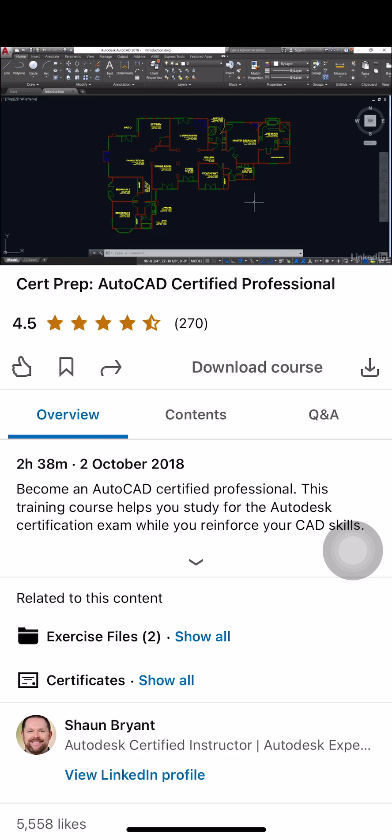You really should have taken the AutoCAD 2018 Essentials course on the website first before doing this course. It's sort of a prerequisite, really. The idea being is we're then going to review all of the aspects of AutoCAD that you need to obviously prepare for your certification examination.

So that's really what you should know. The other thing you should know is that we are using AutoCAD 2018 for the videos in this particular preparation course. Now, don't worry about the exercise files. They will be saved back to a previous version, the 2013 DWG format, to make sure older versions of AutoCAD can read the files.

But what you should know is your AutoCAD Essentials, which you've done by doing the AutoCAD Essentials course. And also you should have been using AutoCAD live in a work environment, a business environment, so that you know how to drive AutoCAD effectively in your workplace. That way you've got the live AutoCAD expertise and you've also got the academic AutoCAD expertise from the videos you've been using to learn from on the website.

As we work through the videos in this course, I'll prompt you to use specific exercise files. Those exercise files are in the usual AutoCAD DWG file format. So if you look at the drawing on the screen in front of you right now, you can see that it's called introduction.dwg. You can go to the website, download that as an exercise file, and use it to follow along with this particular video if you wish.

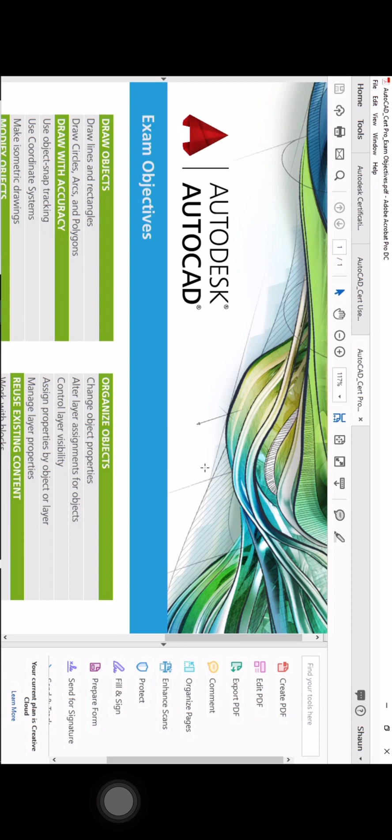We're starting a new chapter now in our AutoCAD Certified Professional Preparation course, and we're going to have a look at drawing objects, how we draw objects in AutoCAD. So I've got a new drawing available for you called Lines and Rectangles.dwg, and the name kind of gives it away. We're going to look at drawing lines and rectangles in a blank AutoCAD drawing that you can see on the screen.

When you download lines and rectangles.dwg from the website as an exercise file, you can see it's an empty drawing. The model space is empty right now. The only thing I will ask of you is make sure that you go to the Home tab on the ribbon, go to the Layers panel, click on the drop down, and just make sure you're using the Object layer as your current drafting layer.

So we're going to have a look now at drawing lines and rectangles. We're going to go to the Home tab on the ribbon, go to the Draw panel here, and click on the Line command there. Now you'll notice I use the ribbon a lot, I don't tend to use keyboard input. If you're using keyboard input, that's absolutely fine, but it's entirely up to you which user interface you use to draw in AutoCAD. So it's prompting me now to specify the first point of my line.

That's nice and easy. I'm going to type in 0, 0. The coordinates pop up on the dynamic input there, and I'm going to press enter. Now it may look like it's off the bottom of the screen - it is, so hold down the wheel on the mouse, move the mouse upwards, and just pan upwards a little, and you'll see that you can see where that line now starts.

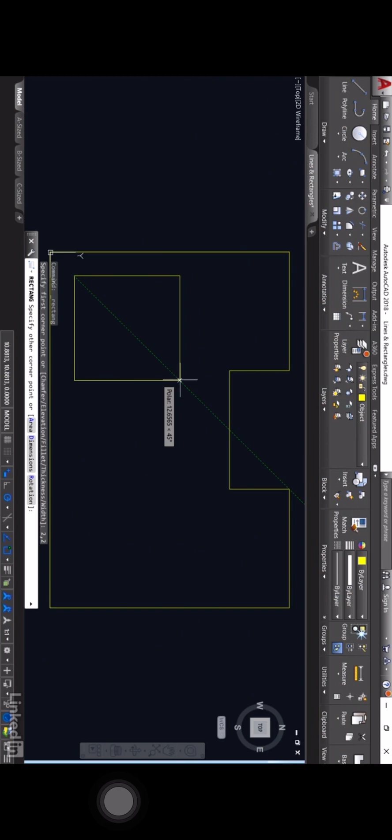As I drag upwards to the right, you can see I can size that rectangle in a freehand fashion. Now I'm not going to do that - I'm going to specify the size of my rectangle. I can do this in two different ways: I can use a relative coordinate, or I can specify the dimensions as you can see on the command line. To specify a relative coordinate, I need the @ symbol, normally Shift and 2 on your keyboard - it depends on American or English keyboard, but look for that @ symbol, the one you use for email addresses. So if I put an @ in there, it appears in the dynamic input, and now I'm going to specify the size of my rectangle.

What you've got to specify is the X direction followed by the Y direction. So in my X direction, I want it to go 6.5. I then press the comma key because it's a coordinate. And in the Y direction, I want it to go up by 11.5. So basically I'm going from that first point of the rectangle, the lower left corner, along 6.5 units along the X-axis to the right, because it's a positive value, and then up the Y-axis 11.5 units, again because it's positive. When I press enter now, there's my rectangle nicely placed like so. That's one way of placing a rectangle.

Let's go back now to the rectangle command. I could go up to the draw panel and click on the flyout to get rectangle, but I've just drawn a rectangle, so I can press enter or spacebar to repeat the rectangle command - you can see it on the command line. So I need to specify another corner point - this time it's going to be 18,4. There's the coordinates, enter to confirm, and it appears over here on the right hand side.

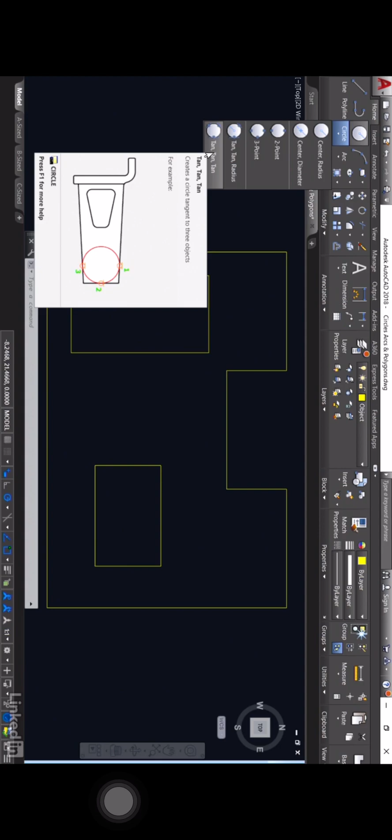I'm going to use tan, tan, tan, which creates a circle tangential to 3 objects, as the tooltip shows. So I click on tan, tan, tan. The good thing is that when it comes to object snaps, AutoCAD now knows only to find tangents. So I hover here, and it gives me a deferred tangent. I click on that line, hover over this line, click on that line, hover over this line, click on that line - 3 tangents - so it now knows where to place that particular circle.

Now let's look at a slightly different method of drawing a circle. I'll go back to the draw panel, click the flyout again, and this time use tan, tan, radius. I click on it, come into the drawing area, and again it knows to look for tangents. I select this line for a tangent, click, this line for a tangent, click. It then asks for the radius of the circle. I'll go for a radius of 2, giving a diameter of 4. I type in 2, press enter to confirm, and there's my circle of radius 2, tangential to those 2 lines I selected.

Now, it's all well and good having objects to provide tangents to create circles, but what happens if I need to physically place a circle in space using a coordinate? I'll go back to the circle command, click the flyout, and create a circle of diameter 5 at a known coordinate.

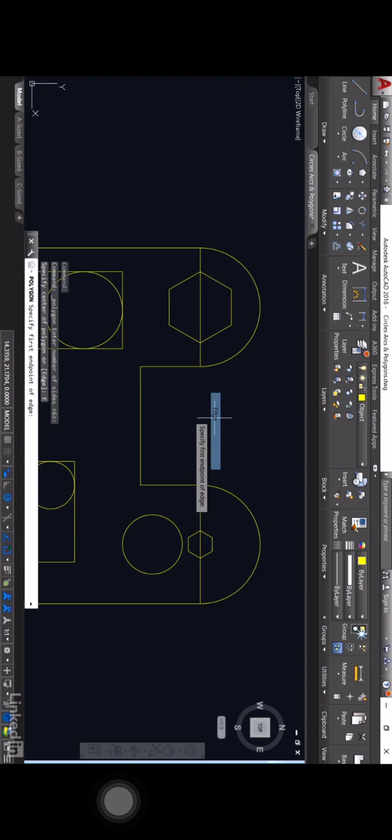So what I'm going to do now is use this edge here, this polygon I've just created. I'll go back to the polygon command, stick with 6 sides, and press enter. Now I'll right click and select edge, and using my object snaps, go from that endpoint to that endpoint to form the edge of the 6-sided polygon. And there again is a hexagon all drawn up neat and tidy using the polygon command.

Now I've used some very simple examples here to show you how to draw circles, arcs and polygons in preparation for your AutoCAD Certified Professional exam.

We're starting a new chapter now in our AutoCAD Certified Professional Preparation course. We're going to have a look at how we draw with accuracy in AutoCAD. Now, I cannot stress enough that the examples I'm giving you are quite simply that - examples. They will not replicate what you will get in your Certified Professional examination. So what I'm giving you here is the ability to review, revise and prepare. It will not guarantee you a pass in your exam.

So for this particular chapter, we're looking at drawing with accuracy, and I've got a new drawing for you. You can see the name at the top of the screen: it's called Draw with Accuracy_tracking.dwg. So you can guess by the name of the file that it's going to be tracking that we're going to look at, the object snap tracking.

So what we've got is a side view and an end view of a small block component with a little cutout and a hole in it. What we're going to do is generate a plan view to the top left above that side view, and we're going to use object snap tracking to do that. The lovely thing about object snap tracking is it allows you to take up to 7 points concurrently and track them without having to draw construction lines. It's very quick and easy to do.

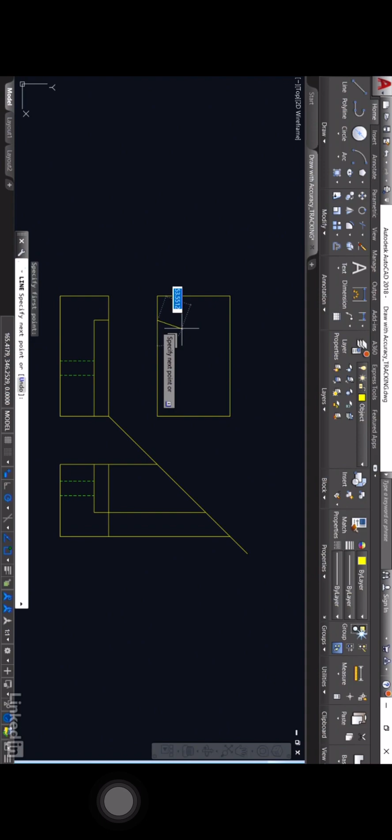Now I've got the cutout line here coming off of the 45-degree line, so I hover there, and as I come across you'll see that I get a snap point again. So I click there, and all I've got to do now is take that across to there, get the intersection, click there, enter to finish. There's my cutout in plan.

Now you'll also notice I've got some dashed lines here - these indicate a hole through my shape. So what I can do now is project those lines up again. Now what I would do here, if I was drawing hidden detail, I would perhaps use the hidden layer, but I don't need to because this is in plan, so basically this hole will now be visible.

So what I do now is go up to the line command again, and I project these lines up onto my 45-degree line. So there's one line there, spacebar or enter to repeat the line command, and there's one line there as well, and then obviously enter to finish.

Now the benefit I've got here is I can actually draw a circle if I want to - I can use a 2-point circle for this. So if I go up to the circle command and want a 2-point circle, as in each end of a diameter, click there. Now this is where you've got to think a little bit about your object snap tracking - specify first end point of circle's diameter, so I need a corresponding end. Now a circle is the same all the way around, so I can figure this out as I go.

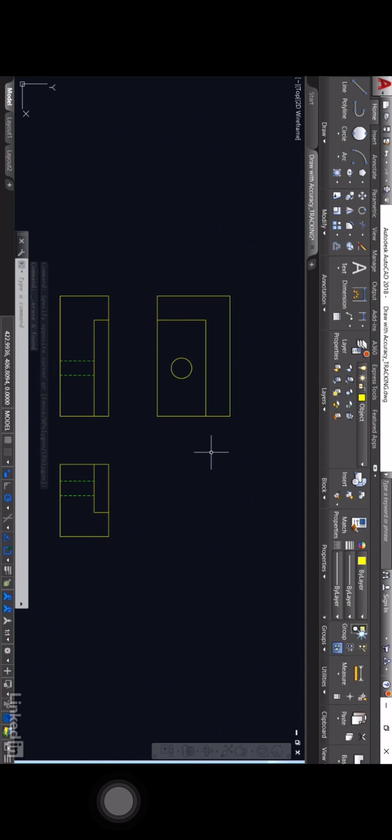Now, all of the lines that I used that are sacrificial, I can get rid of. So I'll do a little crossing selection there, just delete those, and I've now got my plan view exactly in place, purely using object snap tracking.

What we're going to look at now is the ability to draw with accuracy using our coordinates in AutoCAD. Again, we're in the Model tab. I've got a new drawing for you called Draw with Accuracy - coordinates.dwg.

You can download that from the exercise files on the website and use it to follow along with the video. We're going to use the layer called Lines on the drop down on the Layers panel. Make sure you're using the Lines layer.

We're going to draw some lines using coordinates only. We're going to draw a square with 4 lines using coordinates to do it. I'm going to go to the line command on the draw panel on the home tab on the ribbon, click on the line command and come into the drawing area. The first point of our line is 0, 0, enter.

You'll see that it goes almost towards the bottom of the screen. Just pan upwards a little bit, holding down the wheel on the mouse and moving the mouse. Now we're going to type coordinates for each corner of the square. The square is going to be 400 units by 400 units, so I want to go vertically upwards. In this case, I'm going to type 0, 400 - so 0 along the x-axis, but 400 up in the y-axis.

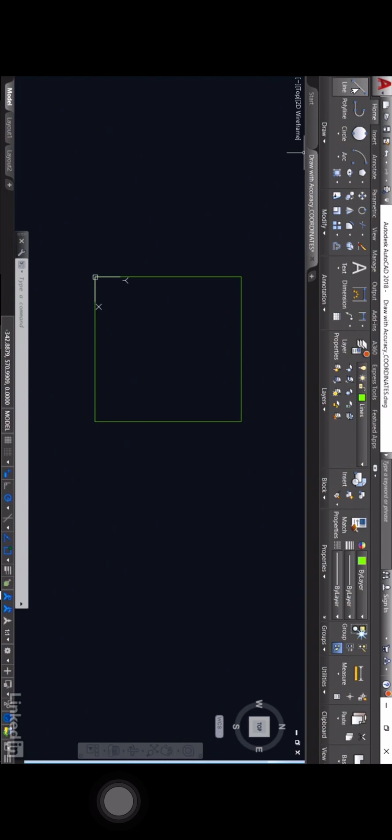I'm going to go to the line command again on the draw panel. I'm going to hover on that midpoint snap there. As I come down, that gives me the exact center point of the square, and I click. This time I want my line to go off this way at 45 degrees. If I want to do that, I've got to move along the x-axis and up the y-axis.

So that means I've got to specify a distance, and I'm going to type @ again because I want it to be relative. I need the @ symbol, then go 400, 400 - so 400 along the x-axis, 400 up the y-axis, enter. If I roll back a bit and zoom out, you can see there's my line.

Now what I'm going to do is come vertically down, and I can utilize my tracking - hover over that end, click there, and enter to finish. As you can see, very quick and easy to work with your coordinates to draw lines at angles and draw straight lines. Now if I want to draw a line at an angle, I can do it a slightly different way - I might have a distance and an angle that I need to follow.

So I'll do a line command now. I'll use this endpoint snap here, click like so. And as I come out and up, you can see that my polar tracking will allow me to work at 45 degrees if I want to. I'm not going to. You can see the distance there as I go along that polar tracking is 298.3398. Let's say 300. So again, I use the relative at symbol, and I want it 300 long. But if I do a less than on the keyboard rather than a comma, which I've just done, can you see the comma automatically takes you to coordinate readout?

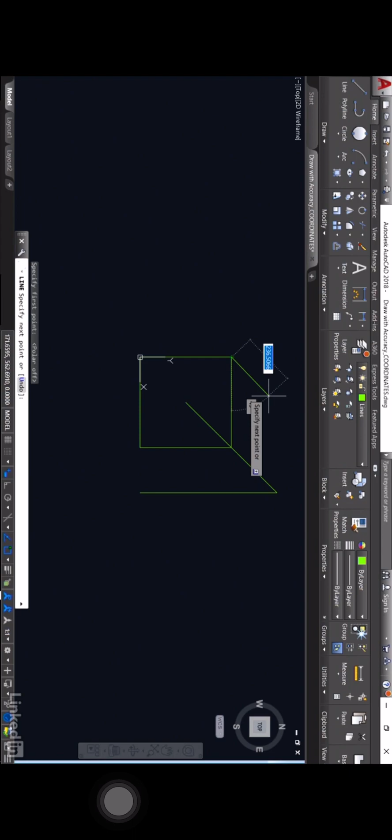How do I get an angle readout on there? Well, let's just hit escape. Let's not use coordinates this time. Let's do that again. So we go to the line command, and this time I'm going to switch off my polar tracking so I know I've got no green dash lines to confuse me. I snap to the endpoint and come out. Now, obviously, the dynamic input is still giving me that angle, but I can't get exactly 45 degrees because the polar tracking is off. So we're going to do that 300 distance again. At symbol first, 300 long, and then shift and comma, and it gives me an angle. How lovely is that? So I can do a distance and an angle, 45 degrees there, enter to finish, and there's my line, enter to close the line command.

So you can see that I can use angles and relative as well. And the other one I could use, if I want absolute coordinates, is the hashtag. Now the hashtag I can use anytime I want, and you'll find that again on your keyboard, depending on whether you've got an English or an American style keyboard. Hashtag is useful, and if you're using a UK keyboard, you'll find that the pound symbol will actually give you a hash key unless you've got a 102 keyboard layout. But if you put a hashtag instead of an at symbol, it's absolute coordinates and they are relative to 0,0 in your coordinate system.

We're staying in our Draw with Accuracy chapter, but we've got a new drawing for you. It's called Draw with Accuracy isometric, and you can download it from the website and use it as the exercise file for this video. Now, as the name states, we're looking at isometric and the ISO draft functionality of AutoCAD, where you can create isometric drawings that give a representation of a 3D object, even though they are a 2D drawing. And you can specify where your ISO plane is, whether it's to the side, looking from the top, and so on.

How do we do that? Well, it's in your status bar settings, but before we do that, just make sure in your layers panel you're set to the object layer, as you can see at the top of the screen. Just use the layer drop down to make sure you're using the layer object, like so. Now, in order to draw in this ISO draft setting, it needs to be switched on. It's down here on the status bar, this funny little line crossover thing. If I click there, that switches it on and it goes red and green. Can you see my crosshair changes? And what it's doing now is telling me I'm in this isometric drafting setting.

And what I can do is click on the arrow here, and I can set my isoplane to the left, to the top, or to the right. So if I set it to the top, like so, and come into the drawing area, I can specify the top of my isometric view. Now this is really nice. I really like this because it allows me to draw quickly and accurately with the right angles, the 30 and 60 degrees that I need to draw in an isometric fashion.

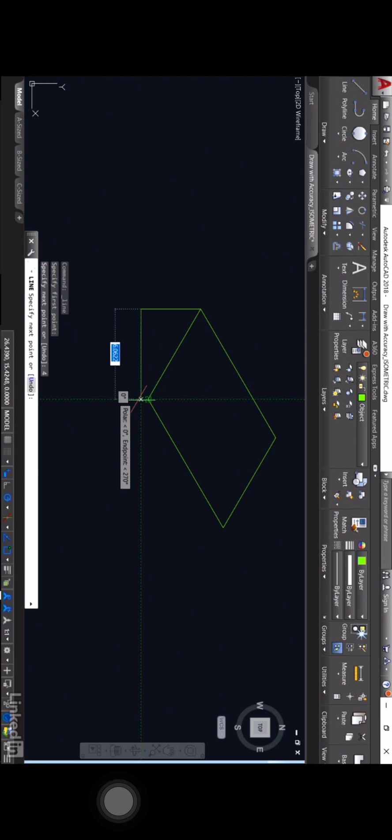I can hover there and come vertically down, using object snap tracking. As I come up this way I've got the angle again, so I hover there, come down this way, and it all snaps neatly at angles so I can draw my isometric view. I snap to the endpoint there, press enter to finish, draw one more little vertical line from endpoint to endpoint, enter to finish, and there's my isometric view.

With that ISO drafting and the ISO planes, it's very quick and easy to create a nice little isometric view in 2D that represents a 3D object.

We're starting another chapter now in the AutoCAD Certified Professional Preparation course. We're going to have a look now at how we modify objects in AutoCAD.

So we've got a drawing now called modifyingobjects.dwg - you can see it at the top of the screen. You can download that from the website and use it as the exercise file for this whole chapter. We're going to start in the first video and work our way through the chapter, saving step by step as you go from video to video, because all of these are different modifying tools we're going to use in AutoCAD. Ideally we're just going to use the same drawing, saving after each video - it's a little easier than using a separate drawing each time as we work through the chapter.

The first thing we're going to look at when we modify objects in AutoCAD is move and copy. Now, there are normally 3 ways to get a command to kick in AutoCAD: you can use the keyboard, the ribbon at the top of the screen, or the shortcut menu in some cases.

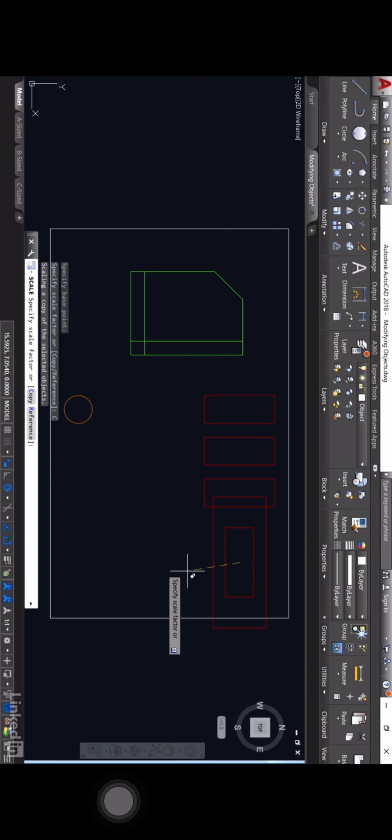Now you'll notice down on the command line there, can you see copy and reference? So if I right click and select copy, it'll leave a copy behind. And if I specify a scale factor now of 1.5 again and press enter, it leaves the original behind. So remember, you can copy, but it won't copy by default.

So that's your rotate and scale when you're modifying objects in AutoCAD.

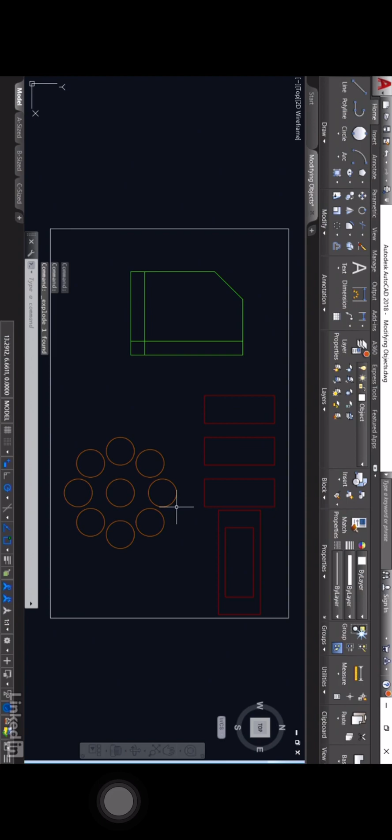So I can remove the ones I don't need. I might not want that one, nor that one. So I just delete those, hitting the delete key, and I've got a slightly different looking arrangement of my circles.

So that's how you use the array command in AutoCAD, and I've shown you some of the simple tools there in how you array and place array objects in a drawing. Now, obviously, as I've stressed previously, these particular exercises allow you to revise, review, and prepare for your examination. I'm not saying that's the sort of question or case study you might get in your exam.

We're staying in our modifying objects.dwg file, and what we're going to look at when we modify AutoCAD drawings this time is trim and extend. You'll find them on the Modify panel on the Home tab on the ribbon.

We're going to look at trimming first, and we're going to trim some of these green lines here on the left of the drawing. So I go up to the Modify panel, click on the flyout here and select Trim first, and I'm going to select my cutting edges. My cutting edges are going to be this line here and this line here, and Enter to confirm that.

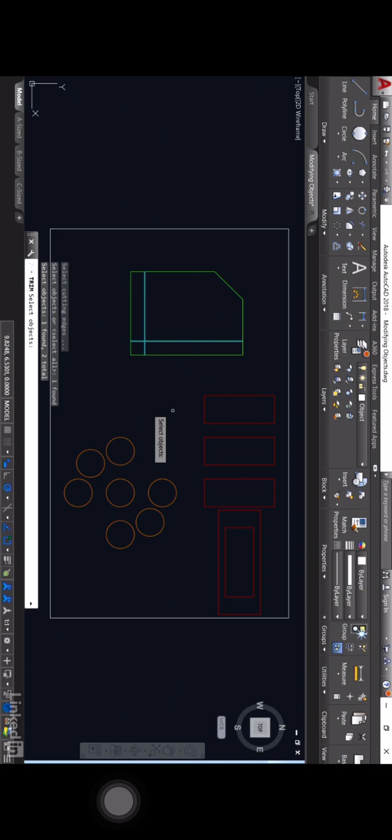I then get the prompt, Select Object to Trim or Shift Select to Extend. So when I'm trimming, I can hold down Shift and extend. When I'm extending, I can hold down Shift and I can trim. So they're kind of interchangeable.

So I'm going to trim back these parts here. I want to trim that, and you click on the bits that you don't want to keep. I then press enter to finish, and as you can see, that's all nicely trimmed. There's a little bit of detritus there that you can just select and delete.

Now I'm going to go back a few steps, and I'm going to undo back to where we were before when we started. I'm going to go back to the trim command, and when I go into the drawing area, can you see at the prompt there, there's a thing called select all.

That means you just select all of the lines in the drawing, and they're all cutting edges. So if I press enter to confirm that, notice it takes me straight to the trim or shift select to extend prompt. I can now trim in exactly the same way, but there's no cutting edges. It's just using all the intersections I've got in my drawing. Enter to finish, and again I'll just erase those bits of detritus there.

Just hit delete on the keyboard after I've selected them. So you can see I've got the same end result, but it was slightly quicker. No cutting edges needed to select that particular time.

Now let's have a look at extend. We'll go onto the modify panel again and click on the flyout and select extend this time. So what I'm going to do is I want this to be an extension edge or boundary edge, and also this one here. And then I'm going to press enter to finish.

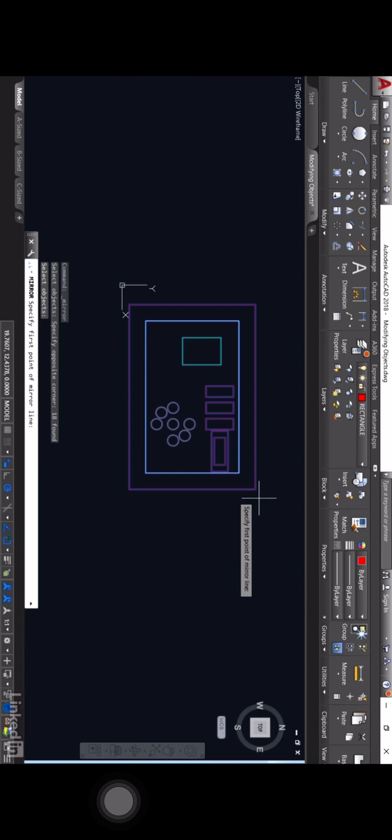Now the first point of the mirror line is going to be the midpoint here. So select that midpoint, left click, and go to the midpoint here. Make sure you get the midpoint like so and click again. Now it prompts you, do you want to erase the source objects? In this case, yes I do, because I don't want two sides, if you see what I mean. I'm mirroring this and I want to keep the mirror.

So if I say yes this time, can you see all the original objects have gone that were handed to the right, and now my circles are handed over to the left, my rectangle there is handed over to the left. If I'd said no to erasing the source objects, it would have kind of been all on top of each other. But you can see how that mirror command works, and it's really quick and easy as well.

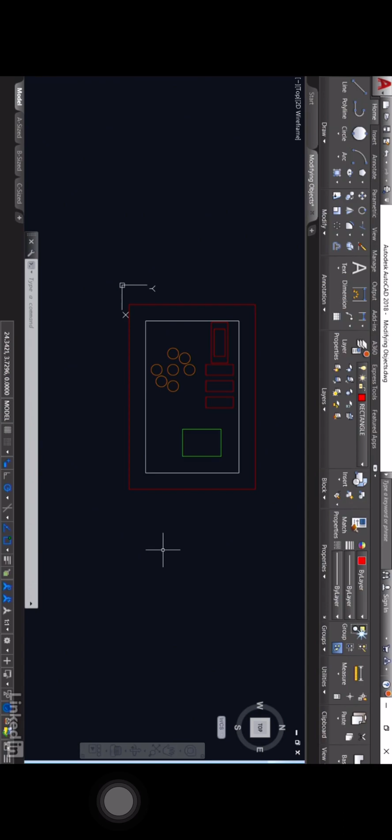So what we've covered there is a little bit of offset, a little bit of mirror, and again it's allowing you to review the workflows and the processes in AutoCAD in preparation for your certified professional exam.

Once again, we're staying in our modifying objects dwg file, and as you can see, I've left it in the same state as it was at the end of the last video. I'm hoping that you're just saving the drawing each time and moving on to each video as we go through this chapter. We're going to have a look now at grip editing.

So I'm going to zoom in on the green rectangle here. The rectangle is made up of individual lines, as you can see. If I hover, each one is an individual line segment. If I select one of the lines, you'll notice it's got three grips, one at each end and one on the midpoint of the line.

So I can click on a grip now, like so, make it a hot grip, and I can drag this line anywhere I want it to go. So if I go to, say, the midpoint snap of the original line and hit escape to deselect the line, you can see I've halved the length of the line. So I can use grip editing to resize individual line segments.

Just pan across a little bit now and maybe zoom in on the center circle of our little arrangement of circles here. If I click on this circle here, you'll notice that I've got grips there. If I click on one of the outer grips, I can resize the radius of the circle. So if I type in 1 there as the radius, makes the circle bigger, hit escape to deselect it.

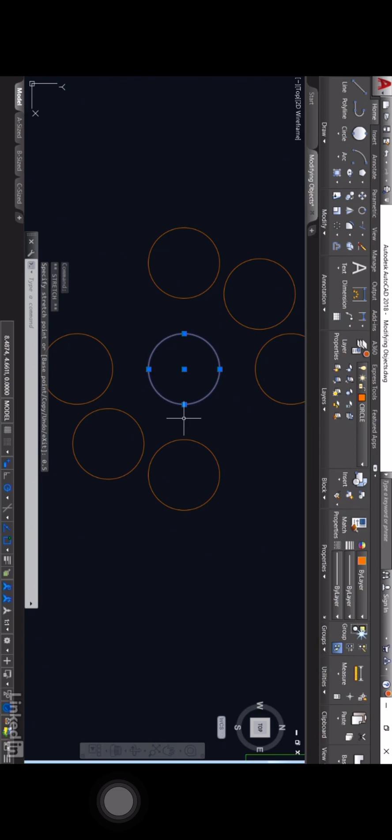Now, obviously, if I come in again and select the circle and click on the grip here again and come in this way and type in 0.5 again, it resizes the circle back to its original size. If I use the center grip and click on it, I can drag the circle around and move it wherever I want it to go. I'll just hit escape this time to deselect it.

If I zoom out a little bit more now, you'll notice here as well, if I click here, that is a polyline, and you can see that I've got grips on each midpoint, like so. That's really useful. So let's hit escape there a second and deselect the white rectangle I've just selected and zoom in on one of the smaller red ones.

If I select that one there, and I click on that grip there and drag it to the right using polar tracking, give it a distance of, say, 0.5 and press enter, I've made that particular rectangle bigger by 0.5 by pulling it out to the right using the grips.

Now, the grips are really, really useful like that. They're really handy, and they make my life so much easier because I can actually just resize in any of the 4 directions. So if I do 0.5 there as well, like that, also brings it out that way downwards as well. If I hit escape just to deselect it, you can see I've got a totally different rectangle to the original rectangle I had.

Now, grip editing as well has a whole group of editing tools as well. So if I select this rectangle that I've been working on, click on the bottom right corner there, and if I right click, you'll notice that we've got some tools that are available that are grip specific.

So I can stretch a vertex, add a vertex, or remove a vertex. A vertex is basically a corner or an intersection. So on that rectangle, each of the vertices are the corners, and the other vertexes are those midpoint grips as well. I can also move, rotate, scale, or mirror around a grip. I can change the base point, or I can copy from a grip as well.

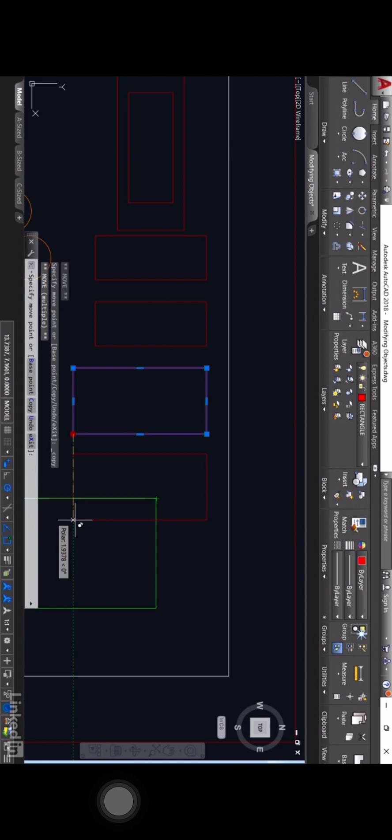So for example, if I did a move for this particular rectangle, can you see I'm moving it about that bottom right grip? Now, if I right click and select copy, it'll leave the original there. And if I just move over here and click there, you'll see I've got a copy. Enter to finish, hit escape to deselect, and it's done a move and a copy around those grips.

So not only do you have the grips and the vertices that you can edit, you've also got all those editing tools available on the shortcut menu as well. So when you're working with your grips, they're like a little miniature editing suite specific to an object and specific to the grip that you've selected on the object itself.

Once again, we're staying in our modifying objects.dwg file, and we're going to have a look now at fillet and chamfer and how we add fillets and chamfers to our AutoCAD drawings. Just roll back on the wheel a few notches so that you can see that red rectangle that we created previously using the offset command, that one there. We're going to add fillet radii to the top two corners of that red rectangle, and then some chamfers, some beveled edges, to the bottom corners of that particular rectangle.

Now, fillet and chamfer are on the Modify panel on the Home tab on the ribbon. They're just here on this little flyout. So first of all we want to fillet. You come into the drawing area and it prompts you to select your first object. Ideally, what you want to do is right-click and specify a radius first. So the radius will be 0.5, and press enter.

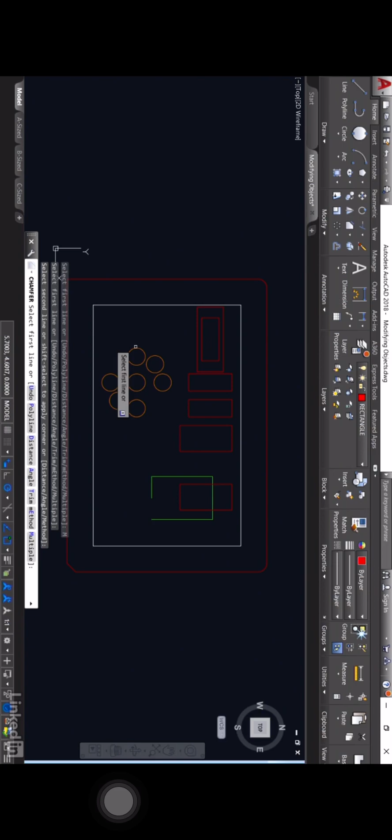And we'll then right click again and go to multiple. We'll do this corner here first. So we'll go this line here, and there's our chamfer. I'll just pan upwards a little bit, and we're going to go for this line here, and enter to finish. Now, I did mention that there's another method of chamfering, which is the angle method. Let's have a look at that.

So I'm going to zoom in a bit now on one of the rectangles, doesn't matter which one of the smaller ones. I'm going to go back here to the flyout and select chamfer. I'm going to right click and select angle this time. So if I select angle, it's asking for a chamfer length on the first line. I'm going to make sure that's 0.5. And then I'm going to specify a chamfer angle of 60 degrees and then enter.

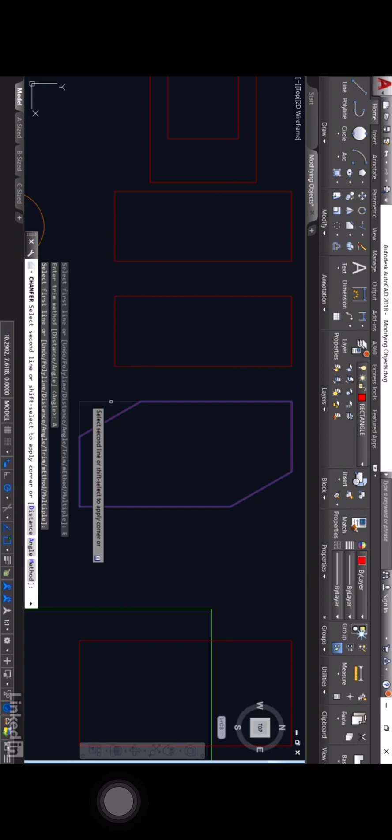Select the first line, that one there, and then that one there. Can you see there's the angle of 60 degrees with the 0.5 at the top. So you've just got to be aware of which line you select. Let's go back and do that again. So I'll go chamfer again, and I can right click and select method. Do I want distance or angle? I'm going to select angle. And again, it'll be 0.5 on this line with an angle of 60 degrees on this line. As you can see, I've chamfered using the angle method on those two corners.

Now, bear in mind, these are polylines.

You can also fillet and chamfer using polylines as well. I'll just pan across a little bit to get these central on the screen.

I'm going to go back to my fillet command on the flyout menu and select first object. I'll right click radius, make sure the radius is 0.5. It's remembered it from last time, so I can just press enter, or type in 0.5 if it's not. If I right click again and select polyline, it'll fillet the radius on all of the corners.

I can do the same with chamfer as well. If I come into chamfer, I'll right click and go to method, and I want the distance method this time. Then right click again and go for distance, and we'll go 0.5, enter, and then enter again because it remembers the 0.5.

Then it's a right click and polyline on the shortcut menu. If I select this one, as you can see, it's now chamfered to 0.5 all the way around. So that's how you utilize your fillet and your chamfer.

Now let me just zoom out here slightly. What I'm going to do now is actually physically explode that polyline. So I'll go up to explode in the Modify panel and explode it. Now I'm going to delete these lines where I just chamfered it previously. So they're deleted. I've got two vertical lines, that one and that one.

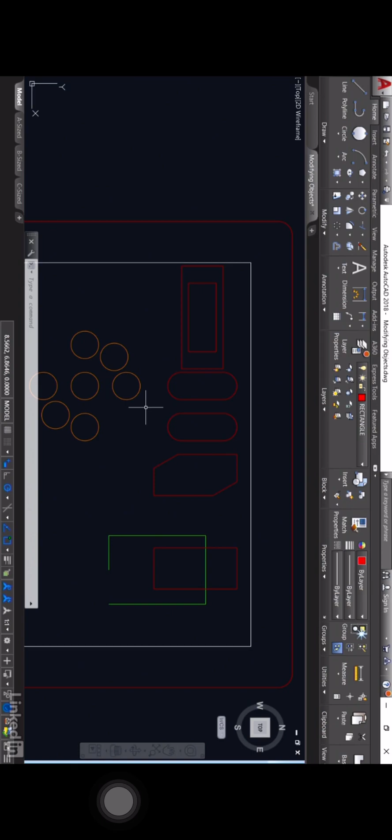So what I can do now is go to the fillet command and just select two parallel lines, that one and that one, and it puts a fillet on the end. Do fillet again and select that one and that one, and as you can see, it does a nice fillet radius on two vertical or horizontal parallel lines. As long as they're parallel, it'll automatically work out the fillet radius for you.

We're starting another chapter now in our AutoCAD Certified Professional Preparation course. What we're going to look at are some additional drawing techniques that you may use when you're drafting in AutoCAD. One of those is the tools around drawing and editing polylines.

Now you'll notice I've got a new drawing for you. It's called additional_polylines.dwg, nice and easy to remember. You'll find it on the website to download as the exercise file to follow along with this particular video.

Now you'll notice over here on the left-hand side of the drawing, I've got an arc and some lines as well. It may be that I want to convert all of those elements to a single closed polyline. To do that, I need to use the polyline edit command. If I go to the modify panel on the ribbon in the home tab, you'll notice there's various polyline commands here, and it's this one, edit polyline, or p-edit, as you can see on the tooltip.

Instead of clicking and finding it on the ribbon and the flyout on the modify panel, just type PE, and that is polyline edit. You can see it there on the suggestion menu. Just press enter and it will prompt you to select a polyline, or as you can see on the command line, multiple polylines. Select any line or arc in this shape.

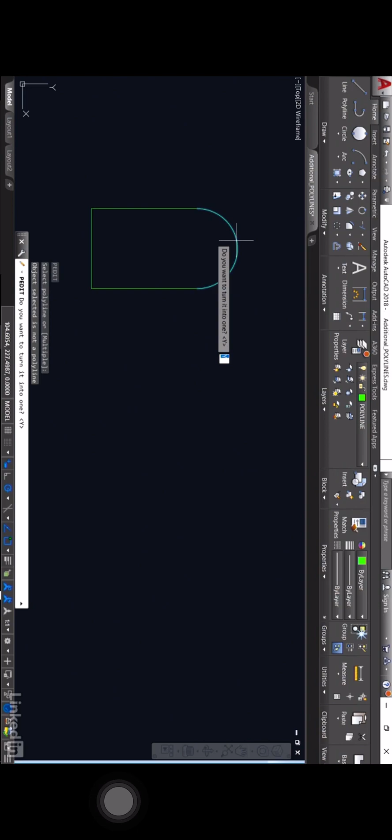I'm going to pick on the arc itself. It now says, do I want to turn that arc into an individual polyline? Well, yes, I do, so I press enter to accept the Y for yes. Then I use join on the polyline edit menu that comes up. So I click on join. I can select this line, and this line, and I can reselect the arc if I want to.

It doesn't matter, AutoCAD knows that's a duplicate. It's not going to affect the polyline edit command. So I'll just press enter now to confirm that, and it's made that into a single closed polyline. I press enter again to finish, job done, and as you can see when I hover over it now, it's a closed polyline. Now what happens if I want to draw a polyline similar to that? Let's have a look at that, let's see how I can do that.

So what I'm going to do is in essence start here. Can you see that crosshair where it is now? There's a line ending there that goes into that arc segment of the polyline. So I'm on the polyline layer here, like so. Make sure you use the polyline layer.

I'm going to go over to the Draw panel on the Home tab on the ribbon and select Polyline. To keep these nice and level, I'm going to hover on this endpoint here and drag a little bit like that, and then click to start my polyline there.

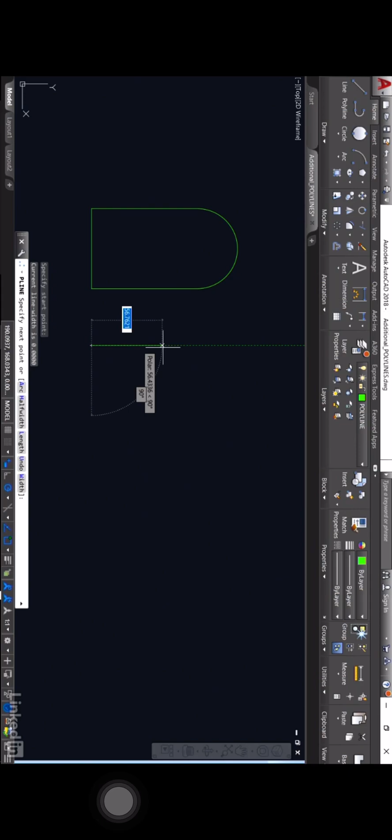Now I can utilize the polyline command and the shortcut menu within it. I'll use my polar tracking to go upwards, type in 85, and enter. So there's the first segment of my polyline, and it's the same height as the vertical lines in the previous polyline where we used polyline edit.

But how do I get that arc on the top? Right now it's just a straight line. So I right click and go to Arc on the shortcut menu, and now I can draw an arc as part of my polyline.

Using the polar tracking, I get it horizontal and drag to the right at 0 degrees. The distance I want is 65 — I want 65 as the diameter of that arc. So I just press enter.

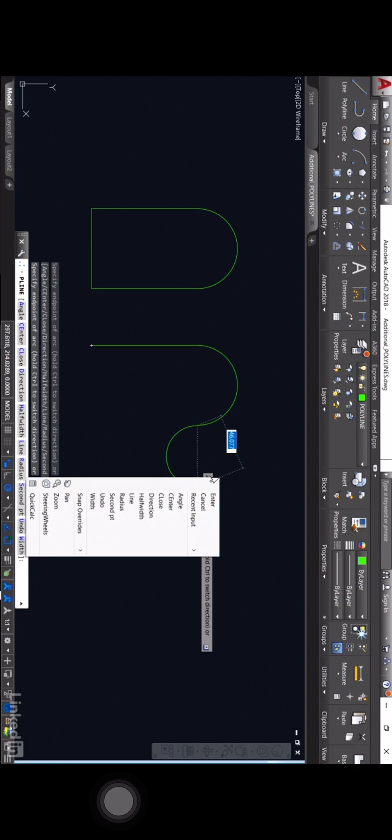As you can see, it's drawn an arc, but now it tries to draw another arc segment, which I don't want. So I right click, go to the Line command part of the polyline command, and I'm back using a line segment. Now the good thing is I can utilize my object snap tracking.

I can hover there and hover there, don't click, and then as I drag down I get the intersection, click there, right click again, and close the polyline. What I've done there is drawn a polyline that is exactly the same as this polyline.

So that's how you utilize Polyline Edit to edit and create polylines from existing line and arc segments, and that's how you draw a polyline with its own line and arc segments using the polyline command.

We're starting another drawing now in our additional drawing tools chapter. The drawing is called additional_blend.dwg, and we're going to look at how we can blend two splines together in AutoCAD.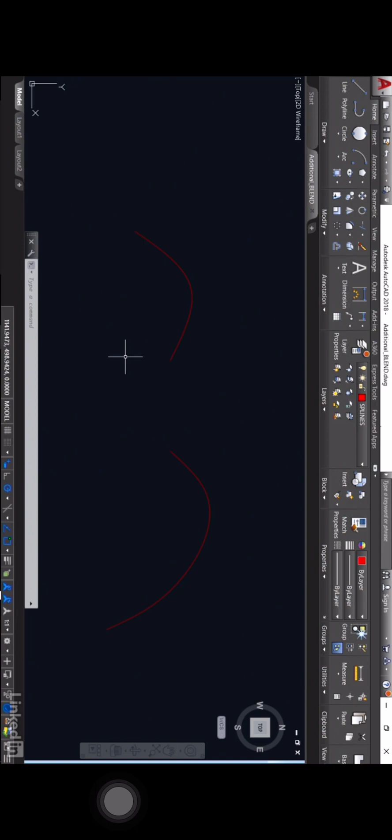You can download the file as usual from the website and use it as the exercise file to follow along. Before we put the blend in between these two splines in this AutoCAD drawing, go up to your Layers panel on the Home tab, click on the flyout, and select the layer Blends. The reason is so you can see where this blend goes — it's a different colour, green instead of red.

Now the blend command is really easy. I always just type it. So I type blend, like so, and you can see it pops up on the suggestion menu. Just select blend on the suggestion menu, and it's really quick and easy.

You'll notice on the command line there is a continuity option. If I right click on that and go to Continuity first, I can have a continuity that is either tangential or smooth. That means you can change the way the splines join together. I normally tend to use tangential because the idea is you want a tangent to join these curves together so they move nice and smoothly between each other. But we can have a look at both.

So we're using tangential now, and then we'll go back and use smooth as well. The continuity right now is tangent. I select my first spline and my second spline — you can see the highlight there and there's the blend, and tangentially it all curves in nicely. So that's using the tangent continuity.

Now I'm going to undo that and stay on the Blends layer. I'll type blend again, press enter just to accept blend. Before I do the select first object, I'll right click and go to Continuity, and select Smooth this time. Select first object, select second object, like so.

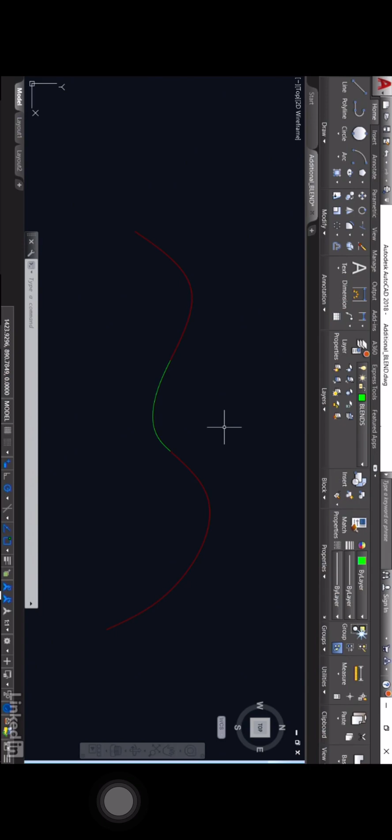Can you see the blend is slightly different? It doesn't look much different, but it is slightly different, and that's because sometimes you get weird and wonderful splines with different curves, angles, and control points. The whole idea of these blends is that they join neatly together so the curve follows through from one end to the other. So that's how you utilize the blend command in AutoCAD with different continuities, tangent or smooth, to get a nice smooth transition between two individual splines in an AutoCAD drawing.

Another additional drafting tool that you might use in AutoCAD is the hatch and gradient facility. Now I've got a new drawing open for you again to use.

It's called additional_hatch gradient. You can download it from the website to use as the exercise file for this video. You'll notice that we've got a little bracket there, and you can see that's a side view and this is a sectional view. Normally you would use something like hatching or cross hatching to highlight where you've cut a section through a particular object.

So this is the sectional view on the right. Make sure you're using the hatch layer here in the layers panel in the home tab on the ribbon. The hatch command itself is in the draw panel, and I click on the flyout here and select hatch. As soon as I do that, you'll notice the ribbon changes, and I've got the Hatch Creation contextual tab up there on the ribbon.

Now, I need to select a hatch pattern. I'm going to go for this ANSI 31, just the regular crosshatch. There's lots of different hatches available, as you can see. I'm going to go for ANSI 31. Now, if I hover over here, you can see it almost looks solid. There's a very, very fine, grainy effect there.

What that means is the hatch scale is a little bit too small. So I go up to the Properties panel here in the Hatch Creation tab, click inside the scale box, let's make that say 10, and press Enter. Now, when I hover, I get my preview, and that's a perfect hatch. I might even make that a little bit smaller, actually, maybe 5, and then press Enter, and there you go. There's a nice hatch there.

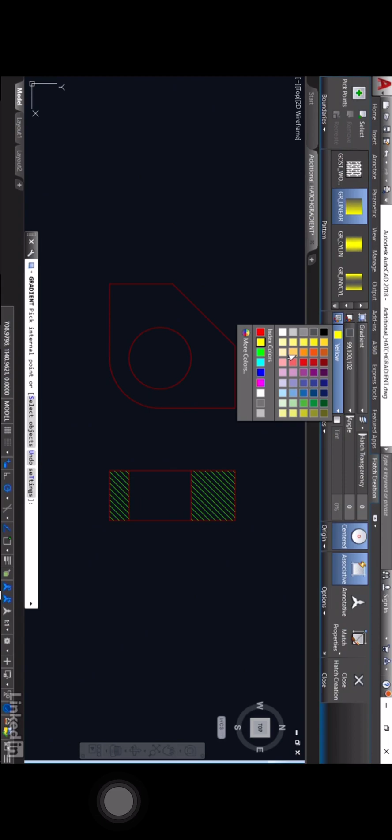And then the second colour, I'm going to go for a reddy pinky colour, that's salmon colour there. Now when I hover, I will actually get a nice sort of salmon pink. It's actually a little bit too bright, in fact. So what I'll do is I'll change this. I'll go for maybe a bluey kind of colour. And can you see I get a nice metallic kind of gradient fill going on there.

Now if I change the pattern, for example, here, let's go for something like curved. If I go there and hover now, can you see it almost acts as if it's got a curve on top of it? And if I click there now, it applies that particular gradient fill.

I'll close the hatch creation here by clicking on Close Hatch Creation on the ribbon, and I've got a nice gradient fill, which makes that look a lot more realistic on the side view. And as you can see, the sectional view gives me that lovely cross hatch so that everything highlights where it's actually cutting through in the sectional view of that particular bracket.

So that's how you can utilize your hatch and your gradient settings when you're working in your AutoCAD drawings.

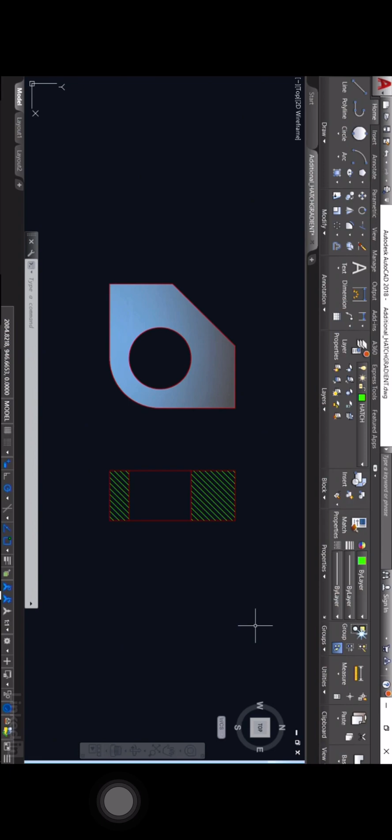We're starting another chapter now in AutoCAD Certified Professional Preparation course. What we're going to look at now is organizing our objects in our AutoCAD drawings. Again, this is the sort of topic that would come up in your Certified Professional exam. It's not an exact exam question, but it takes you through the workflow and processes that you may require to revise, review, and prepare for your certification exam.

So we're looking at organizing our objects in our AutoCAD drawings. I've got a new drawing for you called organizing_properties.dwg. The whole idea of this particular drawing is we're going to look at how we organize the properties of objects within AutoCAD itself.

You can see we've got a little view there, a side view, and we've got some dimensions as well. Now it may be when you're organizing the properties of objects in an AutoCAD drawing that you do it by object or you do it by layer. It does depend. If you're organizing the properties of, say, the dimensions here, you might want these to go on a particular layer, such as the dimensions layer.

So if I select my 3 dimensions like so, I can organize the properties of them by changing their layer. That's changing their properties. If I go up here to the layer pull down and select dims, you can see they go onto the dims layer. If I hit escape to deselect, they've changed color. That's the property that has changed, the color of the objects. That's because the dims layer has a red color associated with it.

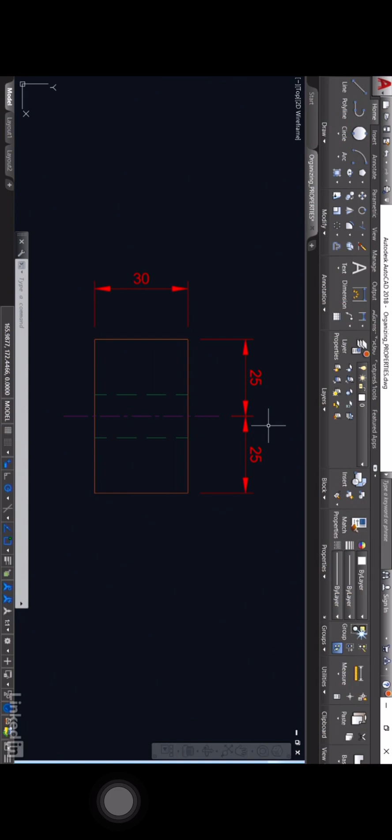Now, the different colors don't define the layer. That's also on layer 0, but it's got a different color, different line type. However, here, what I've done is they're adopting the color by layer because they're on the layer dims, not on layer 0. So that's how you can change all of your properties in your AutoCAD drawings using the properties palette, and also perhaps changing the layer of an object to give it different properties that are adopted with the by layer setting.

The normal way in which you would control and organize your objects in an AutoCAD drawing is by way of utilizing the layers in your drawing. So we've got a new drawing for you here called organizing_altering layers.dwg. It's called altering layers because everything on this drawing right now is on the default layer, layer 0, and it all looks the same. It's all white and using a continuous line type.

Now, ideally, you want to change all of this so that the different layers have different line types, different colors, and so on, and they're all set by way of objects to the by layer setting. I'll come back to the by layer setting in a moment. Let's get everything on the right layers first.

So if you go to the Home tab on the ribbon and look at your layer pull down here, you can see that we've got center lines, Defpoints, dims, hidden, and object. All of those layers are available in this particular drawing, so what we need to do is put the objects onto those layers and alter the layers.

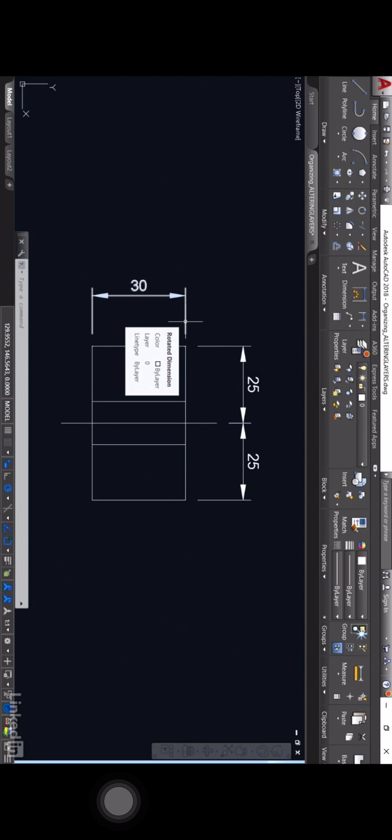I'm going to hit Escape now, and if I hover over that dimension there, you can see it's on layer 0. If I hover over this dimension, it's also on layer 0, as is this one here. Ideally, they want to be on the dims layer. So you select each of them, like we did in the previous video when making changes to the properties. One of the properties, obviously, is the layer an object is on. So if I select the pull down now and select dims, they go onto the dims layer.

Hit Escape to deselect. Now the outline here needs to go onto the objects layer, not layer 0. So I'll select that, go to the pull down, go to object. That goes onto that nice yellow layer. When I hit Escape, it's nice and bright and yellow. These are hidden detail lines, so I'll select both of those, and again using the layer pull down, put those on the hidden layer, and hit Escape to deselect.

Now, if I select the center line here, that needs to go on the center line layer, which is right there, like so. It's also red to tie in with the extension lines of the dimensions. But you'll notice it looks like one continuous line.

Now, I said I was going to come back to that by layer setting. If I go and look at the properties panel now with my center line selected, can you see by layer it should be using a center line type? So if I hit Escape to deselect it and jump into my layer properties, you can see here that center lines are using a center line type. So why is it showing as a continuous line?

Well, if I close the layer properties manager, you'll remember in the previous video we looked at the line type scale. This affects things like dashed lines in your drawing. So if I select that one particular line and right click and go to Properties, and change the line type scale to 0.2 like I did in the previous video, and press enter, you'll see that we now have a visual of the centerline line type there.

We're staying in the Organising Our Objects chapter of our AutoCAD Certified Professional Preparation course. Now, we've got another new drawing for you, called organising_layer_visibility.dwg. Again, you can download it from the website as one of the exercise files, and use that file to follow along with this video.

You'll notice in this drawing, everything is on the appropriate layer. If I hover over a dimension, you can see it's on the DIMS layer. If I hover over the center line, you'll notice it's on the center lines layer. The hidden detail is on the hidden layer, and the object itself is on the object layer.

Now, why do you have layers in your AutoCAD drawings? So that you can clarify the drawing and make it simpler and easier to interpret to work on the design. For example, it may be that the dimensions are getting in the way and you need to either freeze them or switch them off.

There's two options to turn layers off in AutoCAD drawings: you can freeze them or turn them off. There is a difference between the two. If you're using a very complicated drawing with lots of layers, it will take a long time to regenerate and open as a file. So what you want to do is freeze the layers you don't need to see. Then they will not be considered when the drawing is opened again, meaning it will open quicker. If you just switch the layers off, they will still be considered when you open the drawing, and it'll open in exactly the same amount of time as it would if those layers were on instead of off.

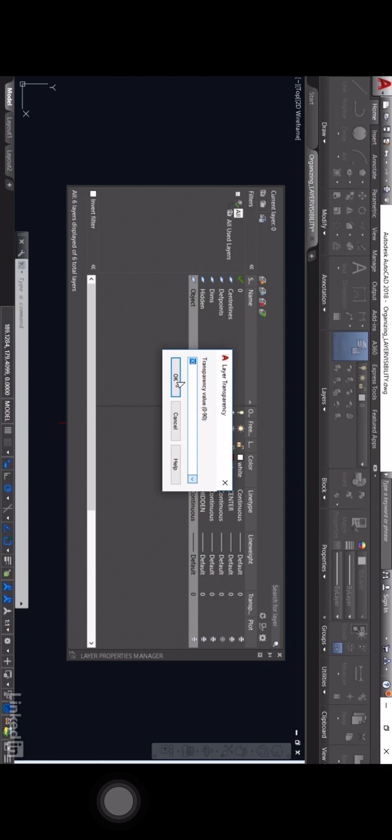The idea behind transparency is that when you're using things like solid fills, hatches and so on, you can have them transparent, one on top of the other, so you can see through things and see detail behind another detail. That's how you control your layer visibility in your AutoCAD drawings.

Again, as I've stressed in previous videos, this is not an exam example. What it's doing is getting you working through the workflows and processes of AutoCAD in preparation for your certified professional exam.

We're in a new drawing now called organizing_assigning props.dwg, and you can see it's very similar to what we've used previously. We're going to look at how we assign properties to individual objects in an AutoCAD drawing. That can be by layer, or it can also be individually by object, where we change the properties of individual objects.

If we're going to assign properties of, say, the dimensions, we might change the color of the dimensions layer. Our dimensions, if I select this one here, are on the DIMS layer. So when I go to the Properties panel on the Home tab on the ribbon, all the settings are by layer - color, line weight, line type are all assigned by the DIMS layer.

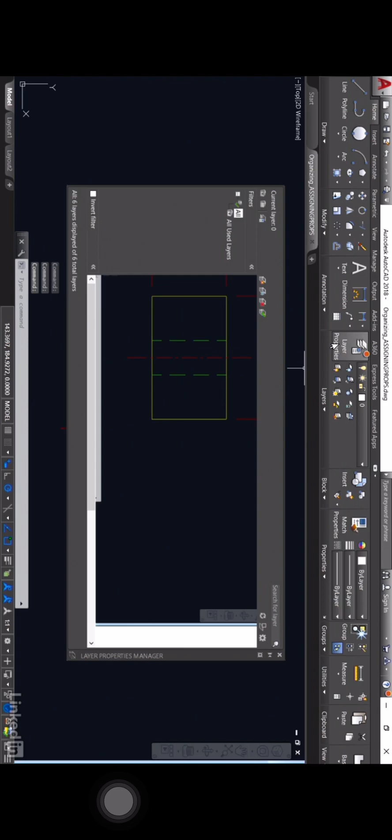Let's say I want to change the color of my dimensions. I'll hit escape to deselect that dimension, then go into layer properties in the layers panel, and there's my DIMS layer. If I want to assign a different property, let's say the color, I'll click there and change it to, say, a purple color - let's go for a nice lairy bright purple.

I'll OK that, and close the layer properties manager. Because it's by layer, it's adopted that property immediately. So I've assigned a different color property to the layer that the dimensions are on - that's doing it by layer with the by layer setting.

What happens if I want to do that individually to individual objects? Let's look at the outline of the object itself here. At the moment, that's a yellow color, and as you can see in the properties, by layer, the color is yellow. The line type is by layer and the line weight is by layer as well.

Let's say I want that to be a different color. If I click on the by layer setting, I can change it to a different color - let's go for that sort of salmon pink. If I hit escape now, you can see the color has changed in the drawing, but if I hover over it, the layer hasn't changed. It's still on the object layer, but it's not using the color by layer - it's got its own individual color.

So if I change that back now to by layer, you'll see it goes back to the yellow color on the object layer. If I hit escape to deselect, it's back to the yellow color.

Now I can do that with things like line weight and also line type. The hidden detail, for example, here is using a hidden line type and it's by layer. Let's say I change that to continuous, and I hit escape to deselect - you can see it's using its own continuous line type, but it's still on the hidden layer. If I go into layer properties, the hidden layer is still using the hidden line type. So because I'm not using the by layer setting, and using an individual object setting of continuous, the line type is continuous.

We're in a new drawing now called organizing_layer_props.dwg. As usual, you can download it from the website as an exercise file to follow along with this video. We're going to look at changing and organizing the properties of our objects via layers only.

So we're going to open up the Layer Properties Manager, found in the Layers panel on the Home tab of the ribbon. I'll drag this across a little, close it first, zoom out a tiny bit, and pan across so you can see all of the layer properties as they change. The benefit of the Layer Properties Manager is that everything is listed and tabulated like so.

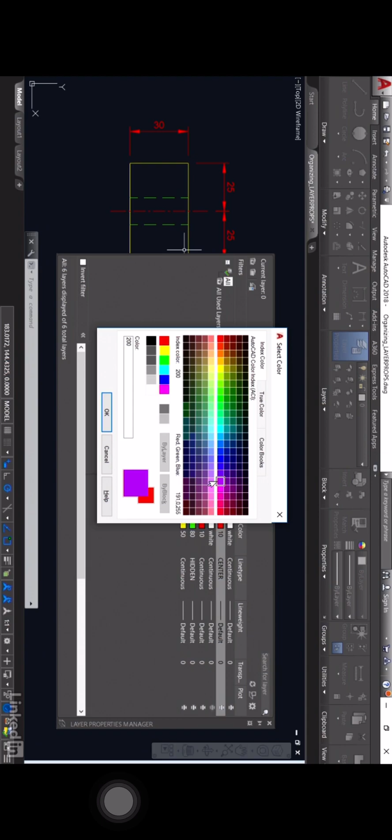I might want to change the color of the layers for the center lines and the dimensions, but they need to be consistent. They're both color 10, so they need to be the same color. I'll click there and give that color 200. Then I'll go to my dims as well and set that to color 200 too. You can see that change on the screen automatically.

Now, obviously, you can change things like line types as well. So you've got my hidden layer there, for example. If I click there, I want to change that to perhaps the center line type. I wouldn't normally, but I'll OK it. You'll see it looks continuous - that's because we need to edit the LT scale, which you may remember from previous videos in the chapter.

So I'll close the Layer Properties Manager now, pan across, and zoom in a little. I need to select these two objects here and change their object properties. I'll right click and go to Properties, then change that line type scale to 0.2, like we did for the center lines. As you can see, it updates. Hit escape to deselect, and you can see it's updated using that center line type now.

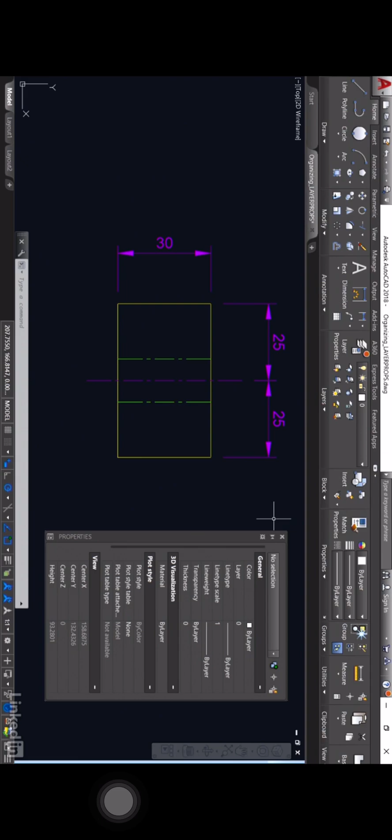But we're controlling that by way of the layers. If I go and hover over that, you can see it's on the hidden layer, but the color and the line type are set to by layer as well. So now I'll close the Properties palette.

I can go back into my Layer Properties Manager now and let's change all of these back to their original colors. The center lines are going to go back to color 10, and the dims as well need to go back onto color 10. Then for the hidden layer, we're going to change that back to the hidden line type, and I'll OK that, then close the Layer Properties Manager.

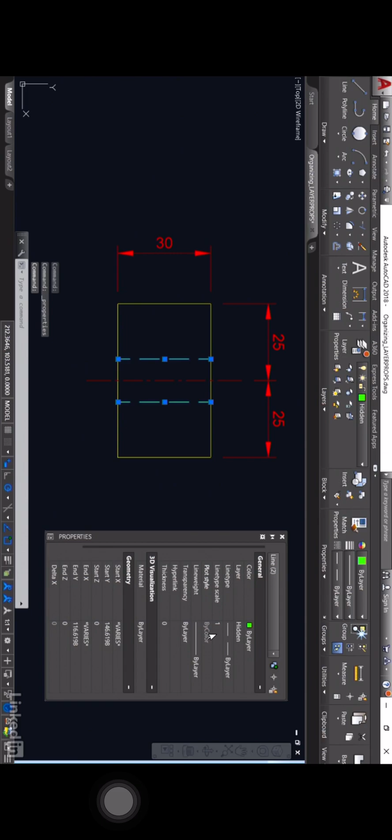Now you'll notice those dashed lines of the hidden detail are very, very small - remember we changed the line type scale as well. So I'm going to select both of those, right click, and go to Properties again. They're still at a line type scale of 0.2. I'll change that to 1 and press enter, and you can see they've got the nice dashes back that they had previously. Close the Properties palette and hit escape to deselect.

So you can see there that you can change the properties via the layers as well, and that will allow you to organize your objects in your drawing differently than if you were changing the properties individually by object.

We're starting another chapter now in our AutoCAD Certified Professional Prep course. What we're going to look at is reusing design content, reusing data from existing drawings for perhaps the existing drawing or a new drawing. To do that, we're going to use AutoCAD blocks and external reference files, or XREFs.

In this drawing, called reusing_blocks.dwg, we're going to look at creating an AutoCAD block. You can download the drawing file as usual from the website to follow along. What we've got is a simple drawing with a rectangle and a couple of lines using the hidden line type. The hidden line type denotes a hole through this object, which we're going to call a sleeve, that will fit onto a shaft at some point in a mechanical assembly.

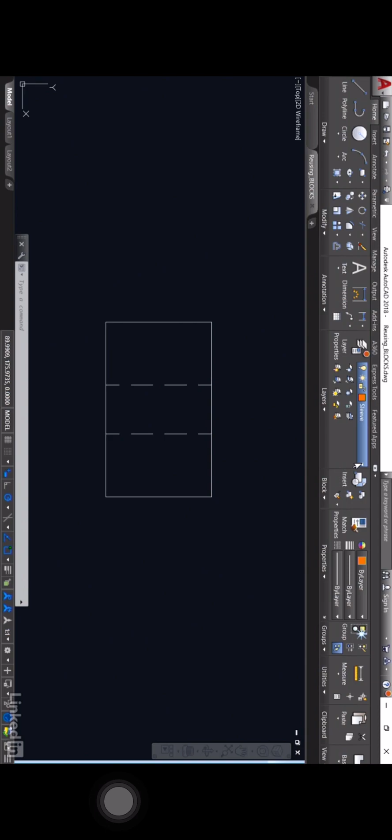Notice we've got some layers here in the layer drop-down in the layers panel, things like center lines, dimensions, hidden object. Make sure you're using the sleeve layer. You'll notice the objects are actually drawn on layer 0, a polyline and lines on layer 0. When creating a block, it's normally a good idea to have all the elements on layer 0. Then when you create that block, it automatically adopts the properties of the current drafting layer when you insert it into any AutoCAD drawing. So how do we make our sleeve block?

The best way to do it is to use the block panel on the Home tab of the ribbon, or on the Insert tab you'll notice block and block definition. We can create our block there as well. Going back to the Home tab, in the block panel, there's also Create Block. Either way opens up the block definition dialog box. I'm just going to call this sleeve.

Very basic, very simple. Then it's prompting us to set up a base point and specify it on screen. Before we do that, let's make sure we select our objects. I'm going to select the rectangle and the two lines, make sure they're selected, then enter to finish. You can see we've got three objects selected.

Now it says base point, specify on screen. I don't want to do that. I want a base point already set up and ready to go. So I'm going to go pick point, and the point I want is this midpoint snap here at the top of the sleeve. That's where the block will be inserted into the drawing.

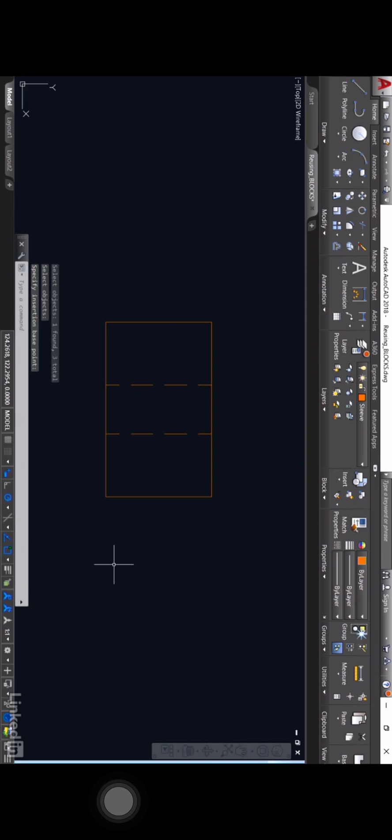You can put a text description in there if you want, something like a mechanical sleeve, for example. That's just a text description, and you can bring that information into things like AutoCAD tables and so on. Once we've got all of that in place, when I click OK, you'll find it has changed color, but it's also changed its properties to become a block.

As you can see, it's a block reference now on the layer sleeve. Because it was on layer 0 when created, it's adopted the current sleeve layer. If I select that, there's the insertion point as a grip, and I can move that around if I want using grip editing tools.

If I right click and go to properties to bring up the properties palette, you'll notice there's the by layer, there's the layer sleeve. Scrolling down a little, you can see the name of the block, sleeve. It's got a rotation of 0, meaning it's horizontal. It's not annotative, and the block unit is millimeters - all the things we set in that dialog box when we created the block. I'll close the properties now, hit escape to deselect, and that's how you create a simple AutoCAD block.

We're starting another drawing now called reusing_attributes.dwg. In the previous video, we looked at creating a simple AutoCAD block called a sleeve, which was going to sit on top of a shaft in a mechanical assembly. We've got the same sleeve ready to be turned into a block here, but you'll notice we've got a piece of text next to it that says SL_name, sleeve name.

Now that is an attribute. Let's have a look at that. If I hover over it, you'll see that it's an attribute definition, and again, it's on layer 0. When you're creating AutoCAD blocks, you can assign attributes to those blocks, which gives information about the block. So in this case, it's the sleeve name.

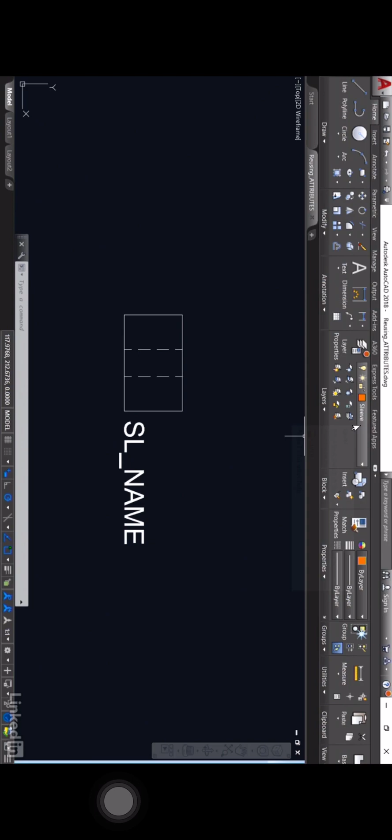So it might have a specific name in the mechanical assembly that it's going into. Now you'll notice that the current layer again is sleeve, and when we turn this into a block, it'll adopt that current layer like it did in the previous video. Before we do that though, let's add another attribute definition to the block before we convert it all into a block. To do that, we need to be on layer 0 first, so we will need to change our layer initially.

We're then going to go to the Insert tab on the ribbon, and you'll see here that we've got Define Attributes in the Block Definition panel. So I click on Define Attributes, and you can see there's various bits of information we need to use here. We could have an invisible attribute, which doesn't show on the drawing when you insert the block. You've got things like constant attributes that won't change, verify attributes where you have to verify the information, and so on. There's lots of different settings you can use.

All I want to do is lock the position of the attribute next to the block, next to the sleeve, and we're going to specify the insertion point on screen.

Now the tag itself is going to be the sleeve number, so I'm going to put SL underscore NO, sleeve number, and then the prompt here, when you're prompted to put the attribute in, will be sleeve number. And the default there, we might put something like SL underscore NO. That's just text that is a default value for the attribute tag. Bear in mind, attribute tags cannot have spaces, by the way.

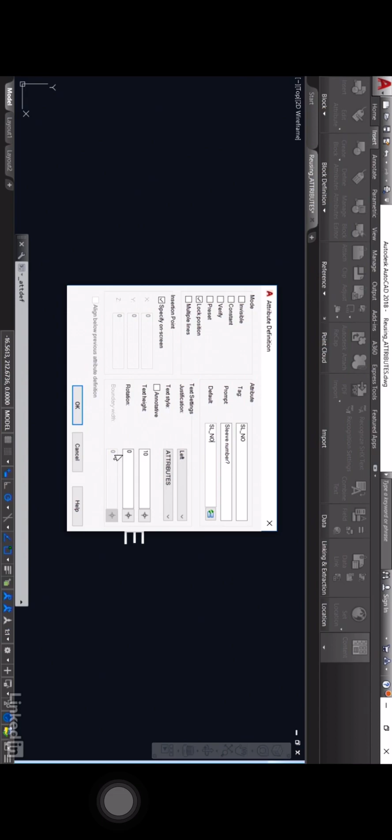So justification, we're going to go to the left. We've got a text style already built into the drawing called attributes that we're using. Text height will be 10, rotation 0. So as soon as I click on OK, you'll see there's my attribute definition.

Now I want it to line up with this one. So how do I get it to line up? Well, what we'll do is shift and right click, go insert, and just hover over that insertion point, and we can specify it there on top of that one. Or I could line it in if I want to—for example, using object snap tracking, or a sacrificial line that I then delete before I create the block.

What I am going to do is just hover over that insertion point and click. That puts it on top of the other attribute, but then I can select it, click on the grip, and drag that up using polar tracking. I know that lines up nice and neatly and it's all left justified. So I'm just going to drag that up a little bit there—it doesn't matter what distance. I'll hit escape to deselect it.

So I've now got my sleeve with my outline and my dash lines and my two attributes ready to be converted into a block. I go back to the Home tab, make sure you change that layer back to sleeve so that it adopts the current drafting layer. Remember, all blocks created on layer 0 adopt that current drafting layer.

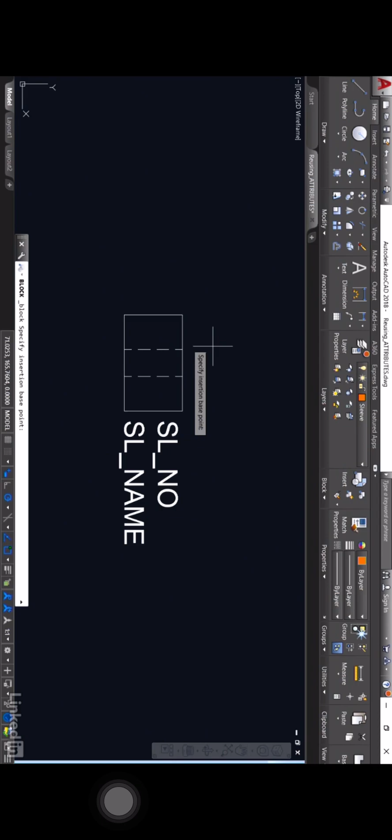So now I can go back to the block panel here on the Home tab on the ribbon, click on Create Block, and I'll just type in here, giving it the same name as the previous video, sleeve. I'm going to pick the point where I want the sleeve to be inserted, using the same point as before, that midpoint snap there. I'll select the objects, like we did in the previous video, but make sure you also include the attribute definitions.

Enter to confirm. So we should now have 5 objects: the rectangle, the 2 dash lines, and the 2 attributes. It doesn't have to be annotative. We will scale uniformly, and we will allow exploding. What we might do there is put mechanical sleeve in the description again, so there's our mechanical sleeve description as well.

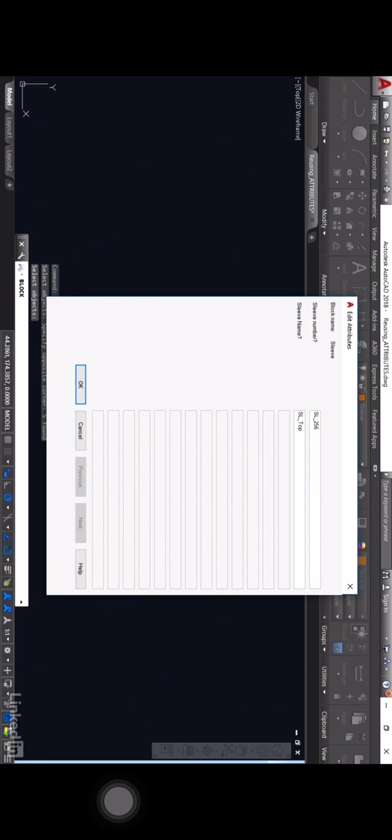I'll click on OK, and you'll see now, as soon as I click on OK, it's prompting me for the attributes. So I'm going to put the sleeve number in. We'll say it's SL underscore 256, just for argument's sake. And the sleeve name might be SL top, so we'll underscore that and put top in there, something like that. Don't worry too much about what the attribute values are.

I'll click on OK, and you'll see that those values come in. If you double click on the block now, you can edit those using the enhanced attribute editor. Because it's a block, you can't edit its physical attributes, but you can edit its block attributes. So you can see there that I can change the sleeve number, I can change the sleeve name. What I can also do is in the text options, I might change the colors or the properties, for example.

So I can do that because the color at the moment is by layer. That's my tag for sleeve name. I change that to say red and I OK that. You'll see it goes red and you can differentiate it from the number of the sleeve perhaps.

Or you might want the number of the sleeve to change. So you double click again, there's sleeve number, go to properties, we'll make that say a blue color. Let's go for cyan, for example, I OK that. And now you can distinguish the 2 attributes from the block, but they're still inside the block.

So as you can see, when you're reusing design content, you can create blocks and give those blocks information using your attribute definitions.

We're now going to start taking a look at reference drawings, or XREFs as they're known, external reference drawings. The abbreviation for that is XREF, and it tends to be used very commonly in the AutoCAD community.

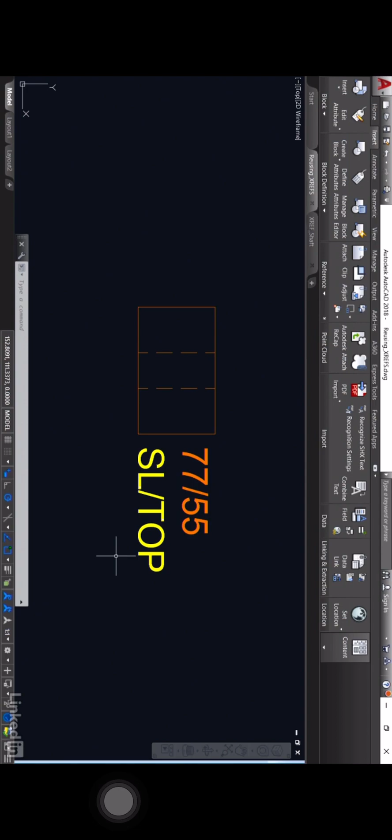Now you'll notice I've actually got 2 drawings open this time, both of which you can download from the website and use as exercise files for this particular video. Make sure that you store them in the same folder so that you can use the relative file path when you're bringing the reference drawing into the host drawing.

So we've got reusing underscore XREFs open at the moment. That's the host drawing. The XREF shaft drawing is going to be the reference drawing that we bring into the reusing XREFs drawing. So the shaft basically will come into this drawing and become part of the assembly by sitting inside the sleeve there. Now, how do we reference in one drawing into another?

Well, we go to the Insert tab on the ribbon, we go to the Reference panel, and we click on Attach there. And you can see that goes to the folder where all my drawings are for this particular chapter. There's the XREF shaft drawing there. You can ignore all these DWL files.

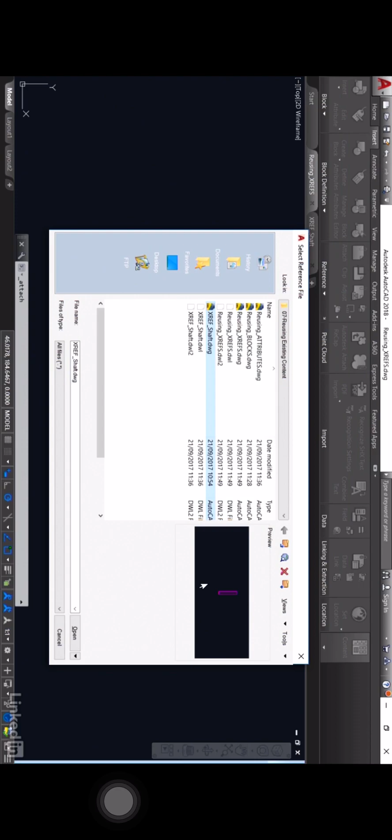Basically, they're telling me that those files are already open and are locked. So if I tried to open those at the moment, it would prompt me only to open a read-only version of the file. There's XREF shaft there, a little preview of it there as well. Click on Open, and I now get the Attach External Reference dialog box.

Notice the path type is Relative Path. If your two files are in the same folder, that's fine, and it will find the file quickly and easily. That's the best way to do it. Or you can go and browse for a file, as you can see up here.

Now the scale itself, I'm going to leave all of that as 1, and it's a uniform scale, so I can tick that box. And insertion point, we're going to leave unticked. We're going to utilize 0, 0, and 0 for the X, Y, and Z values. Now I've deliberately done that for you.

Basically, the point where this XREF shaft drawing comes in is 80, 150. And what I've done is I've located the sleeve at 80, 150 as well. So they're both sharing the same coordinate value, which means you can insert this particular reference file at 0, 0, and you know that everything will fit together. It's a fairly common practice with XREFs to make sure that when you bring a reference file in, it's utilizing the same coordinate settings as the host drawing.

Now, we don't need to worry about rotating it, so we leave the angle at 0, and the block unit will be millimeters. Everything in these two drawings is in metric millimeters. I'll click on OK now, and if I just zoom out slightly, there's my shaft sitting nicely inside the mechanical sleeve.

If I click on it, you'll see I get a very different tab on the ribbon saying External Reference, XREF, which allows me to edit the reference in place, open the reference, or create clipping boundaries to show only certain parts of the reference. In the External References dialog box, you can see the XREF shaft drawing is loaded into the host drawing, the reusing XREF drawing, and I've got options I can use with that particular reference file. I can unload it, reload it, detach it, bind it, and so on.

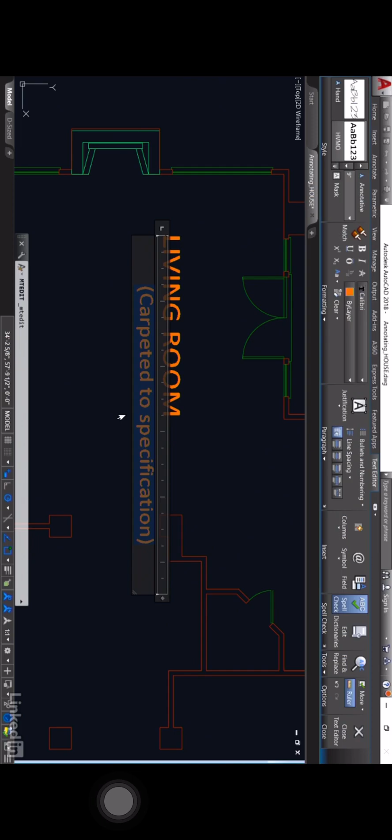Now, the justification of the text needs to be changed as well. It's not middle centered right now. So I go to justification in the paragraph panel and say I want that middle center as well, like so. And as you can see, it middle centers in the box that I specified when I stretched the column size. Click away from the text and you'll see it doesn't line up anymore.

But here's the trick. What I can do is put a little quick sacrificial line in, and I'll do a shift and a right click, and I'll go insert here. The insertion point of my single line text is just up here. Can you see when I hover over it? It's just there. So I can take a vertical line down like so, and then enter to finish.

Then what I can do here is I click there, click on that grip, pop it on the end point there like so, and then just hit escape to deselect. I now know that those two middle center justifications line up. I delete the line, and now all I've got to do is click here, click on the grip and just move that vertically up using my polar tracking, click there and hit escape to deselect, and it's all nice and neatly centered. So that's how you add and modify your text, both single line text and multi-line text, in an AutoCAD drawing.

Another thing you can do when you're annotating your drawings is add dimensions. So we're staying in our annotating house.dwg file, and as per the previous video, you can still see the text that we placed in the previous video. So I'm going to zoom out a bit now, and I'm going to pan, and I'm going to look at this top left part of the house, where you can see the windows there on the corner of the building.

What I'm going to do is in the Layers panel, click on the Layer dropdown here and start using the Dimensions layer to make sure we're using the right layer for the right objects in the drawing.

In the Home tab on the ribbon, I'm going to go to the Annotation panel and click on the flyout again, and make sure I'm using the architectural dimension style. There are a number of them there, but make sure you use architectural. That's the one I'd like you to use for this particular video.

Now, you can see there it had a little blue symbol next to it. That means it's an annotative dimension style. Now, you would normally make your dimensions annotative.

What that allows you to do is jump into something like the Layout tab, as you can see here, and specify a scale that corresponds to the viewport. So if I click on this viewport here and look at the status bar, it's at 1 to 50.

So what I can do is hit Escape now, deselect that, go back to the Model tab, and change my annotation scale here to 1 to 50. That means any annotative dimensions I place will adhere to that 1 to 50 scaling, both in model space and in the Layout tab, and it just maintains consistency of the size of the text, size of the arrowheads, and so on.

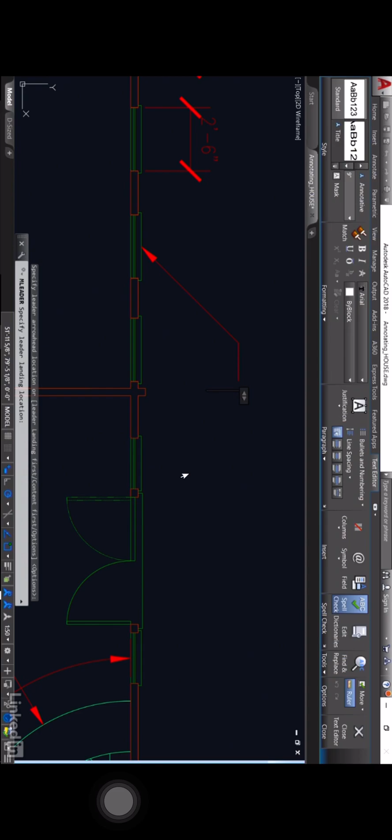I'll use the midpoint snap there. And as I come out, can you see the arrowhead is bigger? And the landing on that leader there is actually longer as well. So if I click like that, can you see the text is bigger as well? So if I now type window and click away from that because it's multi-line text, it all looks the right size. Why is that? Because it's annotative.

And what you would normally do with multi-leaders, like dimensions, is make them annotative so that when you jump into your layout here, can you see if I zoom in close, all of that is consistent. The window text is consistent with the dimension text. It all looks nice and neat and tidy.

Now, obviously, you could go and create your own multi-leader styles there. And a good CAD practice habit here, just double-click on the wheel to zoom extents when you're in a layout tab so that people can see the whole layout just before you go back into the model tab. So that's placing a multi-leader like so.

Let's have a look now at editing a multi-leader. I'm going to change the style. I'm going to click on this little arrow here, and you can see that we've got annotative as the current style. I'm going to click on new, and we're going to call this style just training for now. We're going to start with annotative, and make sure that the annotative box is ticked, and click on continue.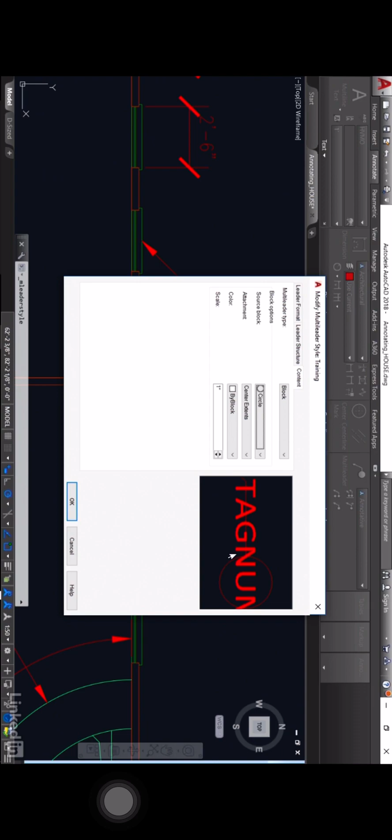Now, I'm not going to change any of the settings because this all works. The only thing I'm going to change is in the content tab, multi-leader type - I'm going to change it to a block. There are some default blocks available in AutoCAD already, and the source block I'm going to use is circle. Can you see there it says tag and what looks like number? It is a tag number - basically a tag with a bubble on the end of the leader line. So I'm going to OK that now, and that's now my training style.

So I'll select it, set it as the current style, and click on close. I'll now go back to multi-leader. I'll pick a different window - let's say this one, the midpoint there. And I'll drag it up, and I can align in a minute, don't worry. So I'll specify the leader landing location, and this time it's asking me for a tag number.

So I'm going to say it's window type A, for example. I'll click on OK, and it puts an A in the bubble like that for me. So I can use that little block setting to create little bubbles like that for window types.

One thing I can do is I can now, for example, align my multi-leader. So I'm going to select this window multi-leader and this A bubble multi-leader and enter to confirm. Select the multi-leader to align to - I'll go for the window one. And as I drag, I can line that up and click there. All done. So as you can see, that's how you can add and modify multi-leaders in your AutoCAD drawings.

We're staying in our annotating house.dwg file. What we're going to look at now is creating and assigning annotative styles. Annotative scaling can be used for things like dimension styles, text styles, multi-leader styles, as you've seen in previous videos. So we're going to look at creating an annotative dimension style.

But it's going to have different features to the dimension style we used previously. I'm going to go into the Annotate tab on the ribbon, go to the Dimensions panel, and click on this little arrow here, which will take me into the Dimension Style Manager. If I close that and go to the Home tab, you'll notice on the Annotation flyout I can also go to Dimension Style there. Doesn't matter which one you use.

Select Annotative as the style in the list, then click on New. You'll notice it's prompting you for a new style name, copy of annotative. We're going to call it training, like so. Make sure you start with annotative, the style, and make sure that's the one you're using.

Make sure you tick the annotative box, and we're going to use it for all dimensions, not just linear or angular. We want all dimensions. Click on continue, and it'll take you into the new dimension style training. We're not going to change much. Go to the lines tab, because we've adopted all the settings of the annotative style here, so the preview looks pretty good.

We just need to tweak a few things. Dimension lines and things, I'm going to set all of this to by layer. You'll notice as you do this with the extension lines as well, everything starts to change color because it's adopting the properties of the dimensions layer, the current drafting layer.

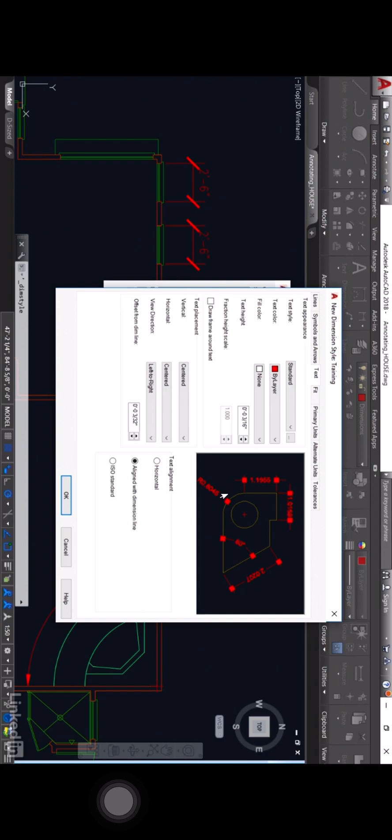Now we know it's an annotative style already because we selected the annotative style from the list. But if you just want to check, there's the annotative box, just make sure it's ticked in the Fit tab. Click on OK, and then select training from the list, set it as the current style, and close. So that is now our current dimension style.

I'm just going to pan across a little bit here so that I've got something to actually physically dimension. I'm going to dimension some bits here near the double doors, and then place a linear dimension using that new dimension style.

I'll go to the annotation flyout here on the Home tab on the ribbon, make sure that my dimension style is training, like so. There it is there. Then I'm also going to click here on the annotation scale and make sure that's still 1 to 50 as per previous videos. Now I'm going to go to the annotation panel again, click on the flyout and select linear.

I'm just going to dimension this double door. Now I'm going to zoom in a bit and actually get the corners of the openings, like that. So there we go there. And as I come out and click there, you can see that is 60.0761 inches because it's a decimal setup.

Now what I can do there, if I want to modify this particular annotative scaling in the style of the dimension style, I can jump back into my dimension style manager. So I go in here like so. If I jump back into training, select it, click on modify, and go to primary units and change the format to architectural.

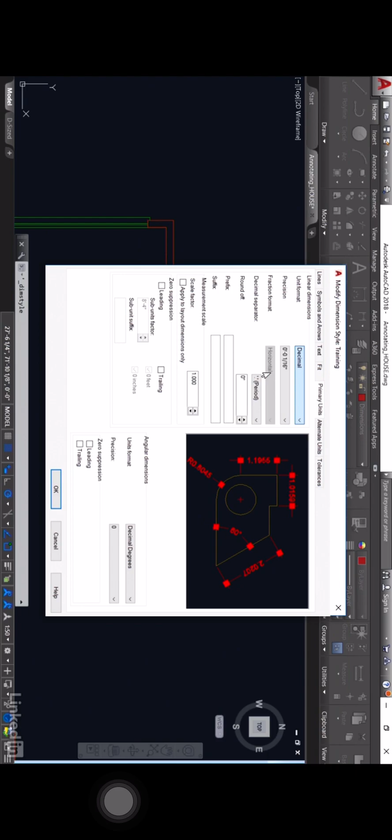Notice it now goes to feet and inches rather than decimal. I click on OK, I click on close, and that now updates. It's now 5 feet and 1/16 of an inch. But you can see the style has remained the same. The only thing I've changed there is the actual readout of the actual dimension value.

So that's how you can create an annotative style for dimensions and also modify that style as well, and also assign it in your model tab while you're dimensioning in your drawing.

We're staying in our annotating_house.dwg file. What we're going to look at now is annotating using a table and a table style in our AutoCAD drawings. You'll notice I've left the drawing at the same state as the end of the last video, and we're in the model tab right now. Double click on the wheel and zoom extents so you can see all of the house in the plan in the model tab.

Then jump into your home tab on the ribbon and make sure you select the text layer. We're going to place our tables on the text layer. You might create a new layer and call it tables, for example, it's entirely up to you. Once you've done that, jump into the D-sized layout tab, and we're going to place our table just here, bottom right, inside our layout tab.

You can do this via the annotation panel on the home tab on the ribbon. I'll click on the flyout there and you can see there is a table style available. So I click there and we've got the standard table style. That's what we're going to use for our table in this particular case. It's perfectly adequate for our needs. There it is, a little preview of it.

If I wanted to create a new table style, I click on new and then continue, and go through the dialog boxes similar to the dimension style we created in the previous video. I'm just going to cancel that for now though, and close the table style dialog box. So in your annotation flyout on the home tab, make sure you're using the standard table style, it should be the only one there.

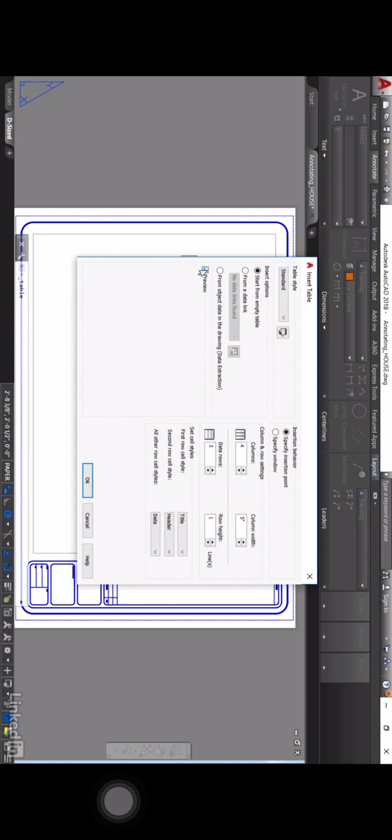So we click on the table command and it brings up the insert table dialog box. There's our table style, standard. We're going to start from an empty table and show the preview, I like to have the preview so I can see what I'm doing. We're going to specify an insertion point and go for 4 columns, which was already there. Column width, if it's not that already, set it to 5 inches for now, that'll do. 3 data rows, so there's our data rows in the preview with a row height of 1 line each.

You'll notice in the settings from the table style, we've also got a title and a header row as well, and you'll see why those kick in a minute. They're slightly different sizes, and we can adapt the table style to highlight things and change things in our title, header and data cells in the table itself. So make sure your first row cell style is title, second row cell style is header, all other row cell styles data. When I click OK now, there's my table waiting to be dropped in.

I'm just going to drop it in there bottom right like so. As soon as I do that, the text editor kicks in because all of the text is multi-line text in an AutoCAD table, so you can see the text editor contextual tab at the top of the screen. Now I'm going to type door schedule in capitals, as I mentioned earlier it's going to be a door schedule for all our doors in our drawing. So I click away from the table now and it inserts the table with the title in place saying door schedule. I'm going to zoom in on the table now a bit so I can see what I'm doing.

Double click in this header cell here - that's going to be my door type. Then I'll tab across for length of door, then width of door, and possibly even height, or glazed, or anything. You can put anything in these headers. Then I tab again and door type A is there, and using the arrow keys, door type B and door type C.

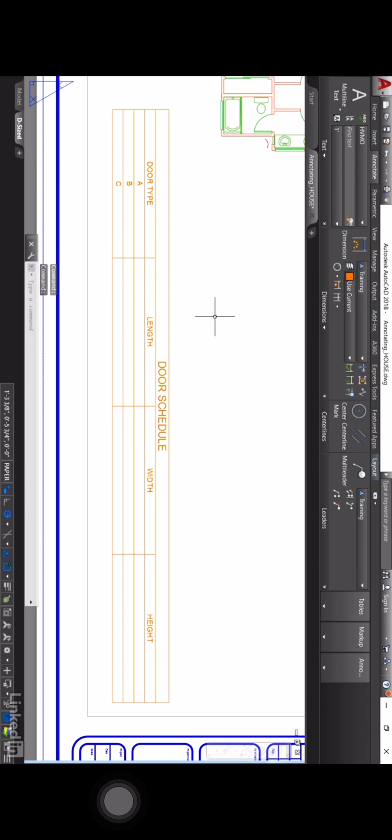Click away from the table again, and you can see I've inserted a table very quickly and very easily. I can start putting values into the length, width and height, and so on, and then edit that to create a nice functional informative table in my AutoCAD drawing.

Now it's good CAD practice to double click on the wheel and zoom extents when you're in a layout tab, so that everybody can see the whole of the layout. As you can see, our table sits there nicely in the layout waiting to be edited and used with the information we need to put in it.

We're now in another new chapter of our AutoCAD Certified Professional Preparation course, and we're going to look at layouts and printing, because at the end of the day you want to be able to communicate your design intent by way of your AutoCAD designs. To do that you would put your designs into layout tabs and then print out those layout tabs to communicate that design to a stakeholder in your AutoCAD project.

Now you can see that we've got a new drawing available for you. It looks remarkably similar to the drawing we used in the previous chapter - it is, but with a few little tweaks here and there, and you'll see those as we go through this chapter. The drawing itself is called layouts_printing_house.dwg, and you can download it from the website to follow along with all the videos in this chapter. So like in the previous chapter, we start with the drawing, and each video just save what you've done so far and then go on to the next video.

In this video, we're just going to look at using layouts to communicate our design intent, then create a new layout and set it up ready to create some new viewports. Now what we've got is, in this particular drawing, our model tab showing our plan of our house. We've got a little bit of annotation going on here and there as per the previous chapter.

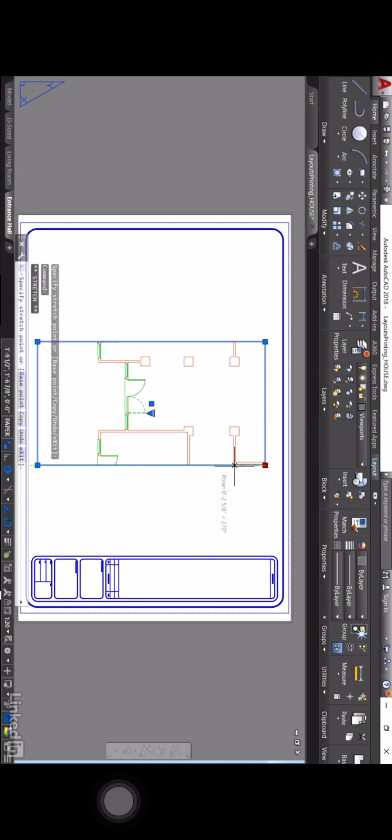So here's the trick: double click outside the viewport to deactivate it, click on the edge of the viewport, and using the grips we can resize it just by dragging like so. I'll click here too and drag across this way a little, and then maybe drag downwards a bit as well, making sure we've got an entrance hall that looks like that.

When I hit escape to deselect, I've still got a viewport showing the entrance hall at 1:20. I can click on that viewport, right click, use Move from the shortcut menu, pick a corner, and pop it up in the top left corner like so, then hit escape to deselect in case it's still selected.

The good thing is that viewport, if I click on its edge, is at 1:20 — it tells me on the status bar. In later versions of AutoCAD 2018 I can also click here and change the viewport scale if I want to. That's quite a nice new feature in the 2018.1 subscription update.

Now, what you've got is a viewport. If I hit escape to deselect it, make sure I'm on the viewports layer in the layers panel on the home tab, then go to the layout tab on the ribbon — not the layout tab in the bottom left corner — I can go into Layout Viewports in the panel, click the flyout, and select Rectangular.

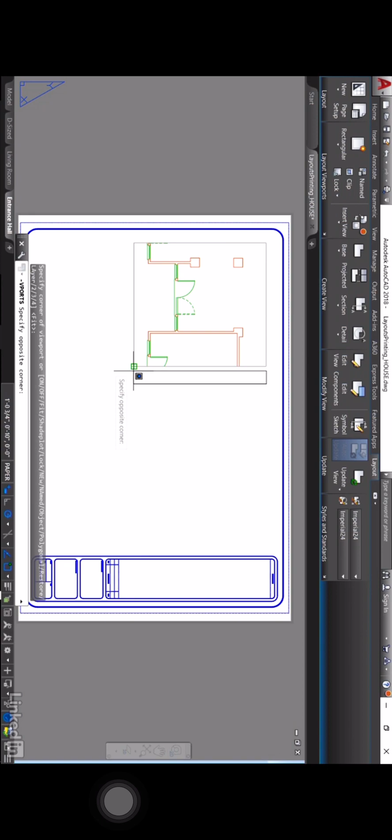What I might do now is place another viewport here like this, lining it in with the corners so it all lines up and is roughly the same size. Now it's given me another viewport with a default view zoomed to the extents — this might be a bathroom detail.

So I'll double click inside the viewport, zoom in on the bathroom, get that roughly central, and then set it at 1:20 to see whether that fits — perfect fit there. Just double click outside the viewport to deselect, and now I've got another viewport at 1:20 showing a different view, but the same scale.

Now, they don't have to be the same scale — you can change the scales of your viewports, move them around, and place them in your layout tab wherever you want. The benefit is that you're communicating your design intent with all these different views of your AutoCAD design.

Once again, we're staying in our layouts printing house.dwg file. What we're going to look at now is preparing our drawing to be printed, plotted, perhaps sent to an electronic file format such as DWF or PDF.

When you're setting up your printing options, the quickest way is to use the Page Setup Manager. We've got 3 different layout tabs. You don't normally plot from the Model tab. The Model tab is where you do all your design and draw everything full size. You then set up your layouts, and they are all set up with a title block and scaled viewports to communicate the information from the model space.

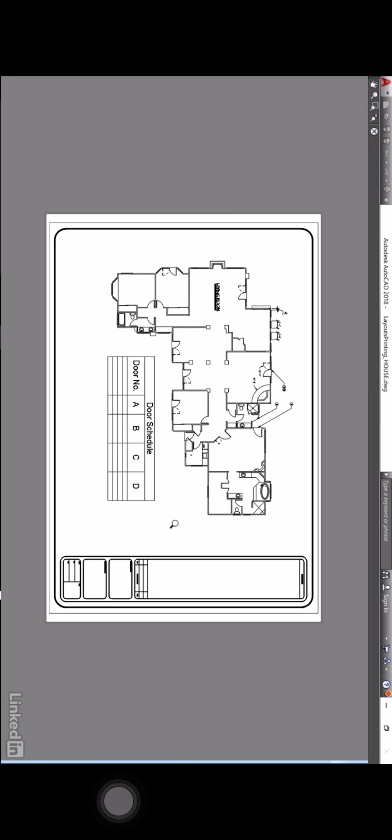But if I click on preview, it'll give me a little preview of my title block, and you can see the viewports layer is set not to plot because it's not showing in this particular preview. I'll right click there and exit, and it takes me back into the page setup dialog box.

I'll OK that, and it'll prompt me now saying that the page setup I just edited, which I didn't—I went in and obviously looked at it, but it thinks I've edited it. So I'm going to say yes just to update everything.

Now I need to apply that particular page setup to my entrance hall and living room tabs. So what I can do now is close the dialog box here, go to my living room tab and make it current, right click on it, Page Setup Manager.

I then highlight D-sized DWF there, and you can see the current layout is living room. If I double click on D-sized DWF, it adopts that D-sized DWF as the page setup. So if I plot it, it will plot using the settings of that particular page setup.

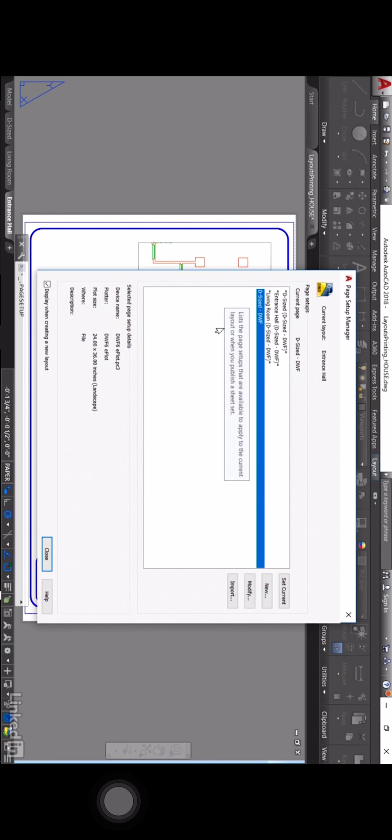I'll close the dialog again, go to the entrance hall layout tab, make that current, right click and go to Page Setup Manager. Again, D-sized DWF there, select it, double click on it, and it applies that now to the entrance hall as well. So I click on close.

Now if I want to plot these, I can just right click now, go to plot. It tells me the page setup at the top of the dialog box that I'm using. I can now preview that, and you can see that it's all ready to plot. There's my two viewports, and there's my title block and so on.

I'll right click and exit that. Takes me back to the plot dialog box, so I'll just click on cancel. As you can see, when you're preparing your drawings to print or plot them, ideally you want to be using your Page Setup Manager.

Now I'm not going to plot anything for you because there's nothing more boring than watching AutoCAD plotting drawings. The idea obviously is to make sure that page setup is set up effectively so that you can apply it to other layout tabs in your AutoCAD drawings when plotting and printing to communicate your design intent.